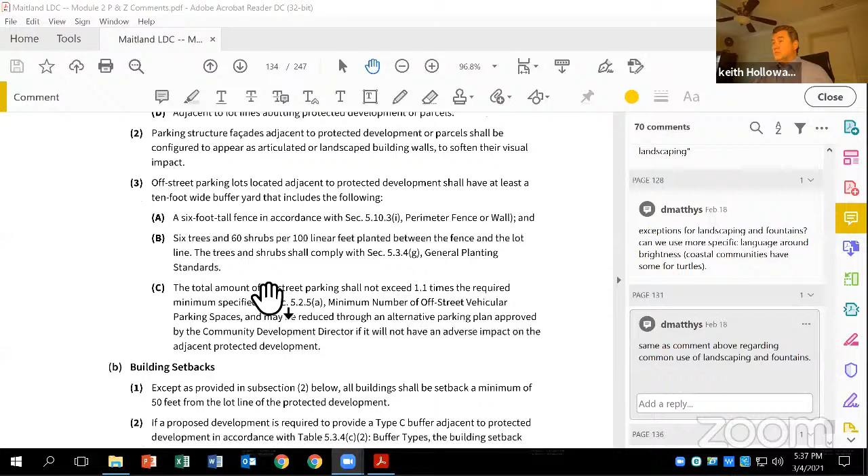So the first comment was from Kathleen on page 523. Footnote, is this applied citywide? These are the residential compatibility standards. Is that your question, Kathleen? Yeah, correct. Yep, these are applied citywide. Right now they're in place for downtown, but this would basically apply to any commercial development abutting a single family neighborhood. Okay.

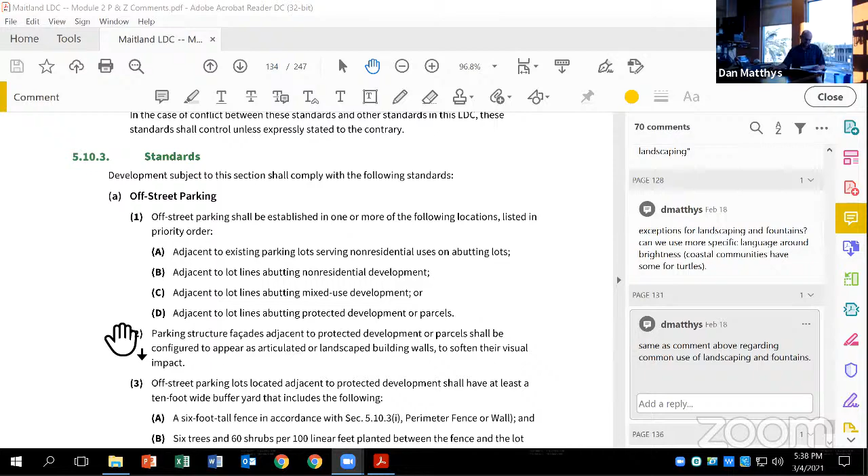So kind of like before, I think what's been working well is if the author of the comment wants to state it, and then we can all discuss it, rather than you'll hear enough of me talking anyway. So if you go to comment 2, Kathleen, that's yours as well. Yeah, I was just questioning the density of the bushes, what they were asking for on B, the 6 trees, 60 shrubs per 100 lineal feet. Again, when you start planting that, how is that? Are they going to survive if they're in front of each other? Are they going to be able to get enough sun? Is it going to be enough? You hate for people to waste money on landscaping and have it die because of the quantity we're making them put in.

Sure, and this is consistent with what we do now. Okay, it does seem like a lot, but you have to bear in mind that it's 10 feet wide. So if you think about it being linear, 100 linear feet, but it's 100 linear feet by 10 feet in width, that's why you can stagger them to get that fullness and thickness. Okay, so I don't know that I see where it says it's 10 feet wide. Up here, so I have a 10-foot wide buffer that includes... Okay, got it. Right, so it's 50 feet, it's going to be 3 trees and 30 shrubs in a 50 by 10 area. Okay.

Thank you. You're welcome. And number 3 is yours as well. Yeah, I was a little concerned with just reducing down, that it's specifically that the community development director can just reduce the parking below the minimum of what we set here in the land development code. And that I don't know why we'd want to allow it to be reduced below the minimum.

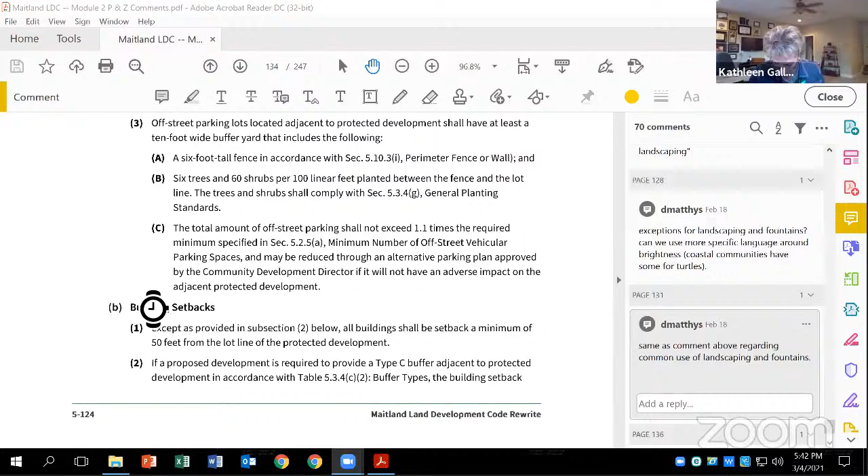Okay. And then the next one, just... oh, you know what? I think I have the wrong page.

Well, no, I don't. Well, yes and no. And I think I missed one, because the building setbacks, I had right there B1, where it says except as provided in subsection 2 below, all buildings shall be set back a minimum of 50 feet from the lot line of the protected development.

And I wanted to know how that works on like Maitland Avenue or Horatio Avenue, because I don't know that those lots are big enough to have a 50-foot setback. Because the ones off of Maitland Avenue, I don't know that they don't abut right. Oh I see, some of them do. Yeah, some of them do.

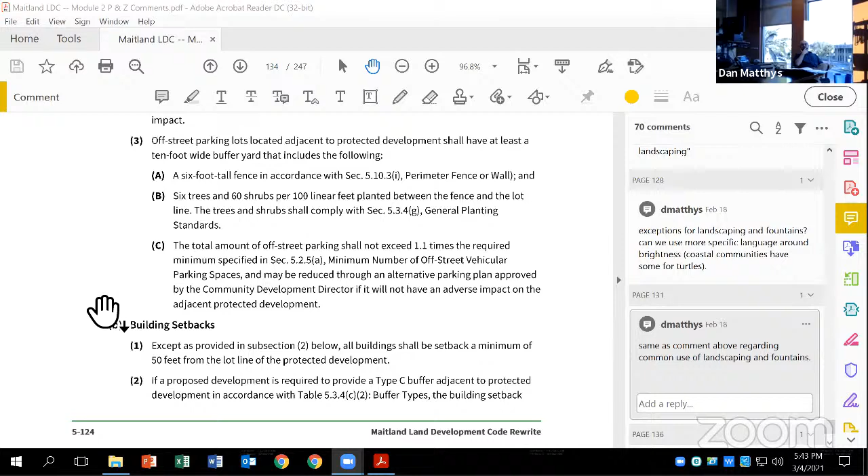I see what you mean. So how do you put a 50-foot setback? You see what I'm saying? If it's a 100-foot wide lot, then it would have to be pushed up against the Maitland Avenue side, essentially. Correct. I brought the same thing up, Kathleen, about a different, I think it was related to lakes or something, but it was the exact same comment.

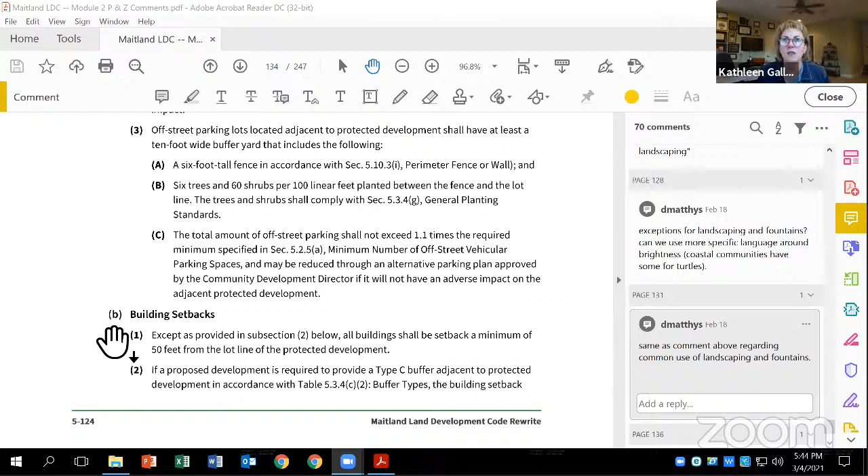What happens if you don't have it? Right, well, and then, right. So do we not do development because of that? Or, that's my question, again, I'm just trying to visually see how do you do a 50-foot setback on, like you just said, a 100-foot lot?

Well, you do have the exception here below, where if you provide an 8-foot masonry wall, you can reduce that buffer to 35 feet. And that was something that we put in there because we thought, not in all circumstances is 50 feet appropriate, and so that would come into play there.

So you'd have a 35-foot setback from the protected development. And you would just have to, it's a matter of certain kinds of development on that corridor district of Maitland Avenue. You just have to, it'd be a challenge for how you orient your buildings, essentially. Right.

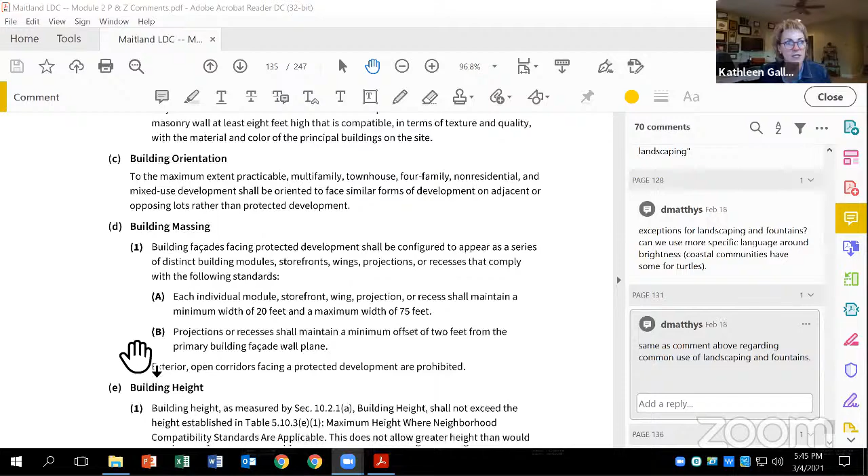Okay, and then down to the table, same thinking or line of thinking on that table, where it's 100 feet to 150 feet, the maximum height lesser of 4 stories or 45 feet. And again, I'm just trying to, like Glenn, get the visual. How would that work on a Mercedes dealership property?

Just again, taking that lot, it's long, it's not wide, and it backs up to a neighborhood. Correct. And so, yeah, it's long and narrow.

Well, they wouldn't be allowed to go over 3 stories, which I don't think they are currently. I don't believe that garage exceeds 35 feet. They have an 8-foot masonry wall. I don't know what that wall exists right now, but I don't think it's 35, I don't think that it's set back 35 feet. I think so, if those standards were applied today, I think you'd see that building pushed back away from that residential development. Do you know how far that existing structure is from the Versailles neighborhood?

For that, I don't. But you know, when you kind of look at it driving by, and then the other thing is how much closer can you push it to the street? Well, I think it's fair to say that if that would be something that would be really interesting to do in our testing phase.

Apply these standards to a potential hypothetical redevelopment of that site. I think you would see that the building, instead of having parking in front where there's cars parked, our standard would call for that development to be pushed up to the street. So the building would be closer to 1792, but it also calls for parking, when possible, not to be next to the residential neighborhood. So I don't have that complete answer, but it would be a very interesting test case.

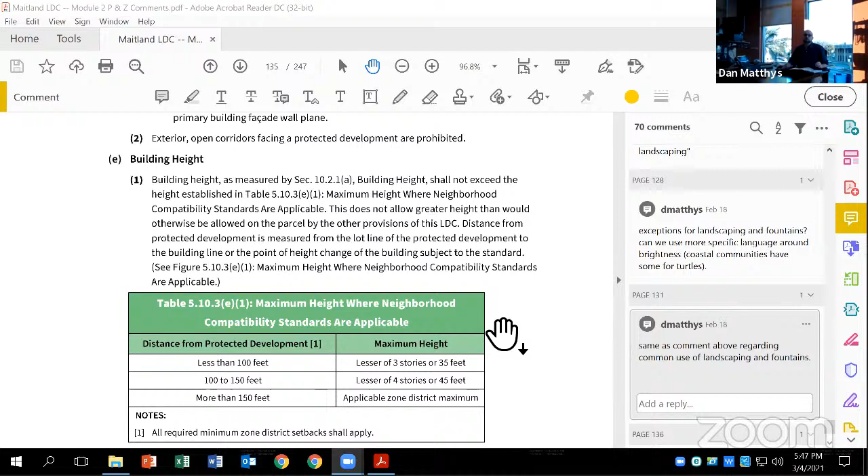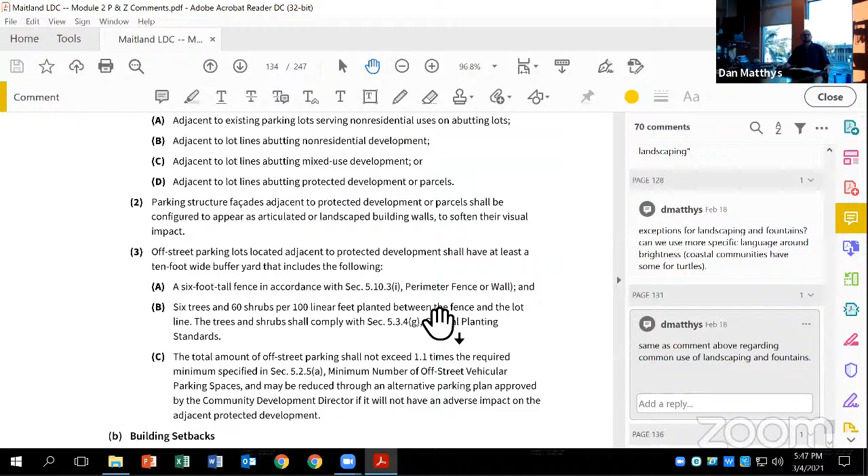In this one, we may need to have some relief language. The language that's in there about the 100 feet, 150 feet, that was specifically added by council during the comp plan amendment when we were doing the Main Street future land use. During the transmittal meeting, council specifically said there's 2 sections along Main Street where we want a wider distance of setback, and one of them was that area where the Mercedes dealership is, and the other one was down by like the Enzian area. They said those 2 areas, we want instead of 100-foot transition, we want up to 150 feet transition.

And so that's how the comp plan was adopted. So this was just kind of following suit with the comp plan. If we need to have some kind of relief mechanism, potentially through a PD, they can ask for a height variance or something like that. That's something we can definitely consider doing.

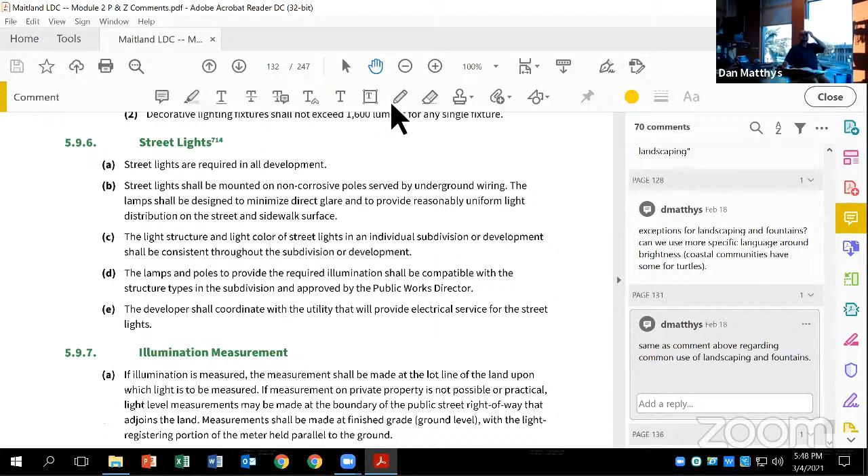Okay. It's a good point though, because that is a long skinny piece. Right.

What is going on here? Why can't I do comments?

The exterior lighting on 127 says the source of illumination is not visible from a public street right of way or an adjacent protected development. I understand the protected development part, but why wouldn't you want a public street right of way or sidewalk to be lit? You don't want glare projected into people's eyes while they're driving.

The lights for the right of way are specifically designed for illumination and safety. This standard specifically applies to lights on a building. If you imagine a security light shining out from a building that crosses over into oncoming traffic, we don't want that happening. That's the idea.

Oh my God, I'm struggling here. I can't, it's not letting me put comments on. What's going on? I might just have to close this. Let me close it and reopen it.

While Barrett is trying to get the screen working, we had a case on, I think it was Maitland Concourse South, where the building installed what they called security lights that were really, really bright, almost like floodlights, all up along Maitland Boulevard, along that building. We were getting a lot of complaints, even from the brightness that you could see across the street or even on the street. So it's really just to protect against something like that happening.

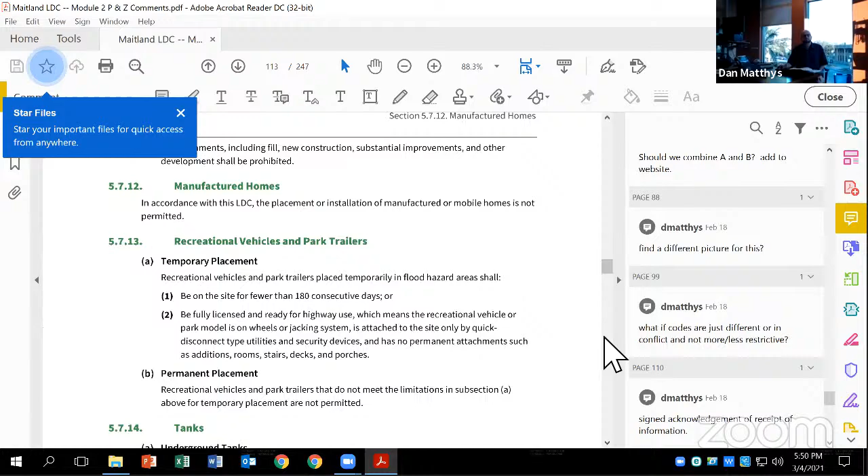Where was the property? It was Maitland Concourse South, the offices on the south side of Maitland Boulevard. They had gone in and installed these really, really bright floodlights that, instead of pointing down, were pointing straight out, lighting up a lot of area that it didn't need to.

The next one is the signage right below it, a minimum of 150 feet from the lot lines. Kind of what Glen and I were just talking about, what if you don't have 150 feet? I think that's a great point, especially there. There's a lot of lots that won't have 150 feet, so that's a good catch. We'll probably have to write a standard for cases where that's not possible, with an alternative.

Right, so, there we go. Okay.

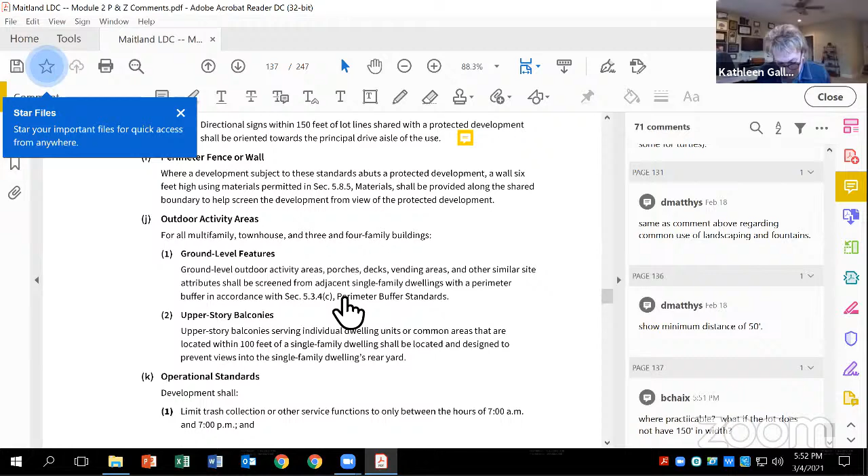Okay, and then the next one right below that: the perimeter fence or wall. It says where a development subject to these standards abuts a protected development, a wall 6 feet in height using permitted materials. Then if you go back to 125 at the top, it talks about a solid masonry wall at least 8 feet in height that is compatible.

I see how that's a little confusing, but the 8-foot wall is only required if you're using it to reduce the required buffer. In other words, if you want to go from 50 feet to 35 feet, you have to use an 8-foot masonry wall. Otherwise, you can use a 6 foot high wall, and it can be other materials. So there has to be a wall no matter what. It has to be 6 feet tall using those materials, but it has to be an enhanced wall, 8 feet in height and specifically masonry, if you're reducing that buffer from 50 to 35 feet.

Okay, so should we say in there just a wall 6 feet high using, and then insert 'or other materials permitted' so that it's a little bit clearer?

Does that make sense? 5.8.5 is just referring back to the material standard. Do you mean the previous mention? No, where we are in 127, the perimeter fence or wall section. It says a wall 6 feet high using, and I asked should we insert 'other materials permitted' right there, versus the other one, which says a masonry wall at least 8 feet high to get the 35 feet. Now I understand.

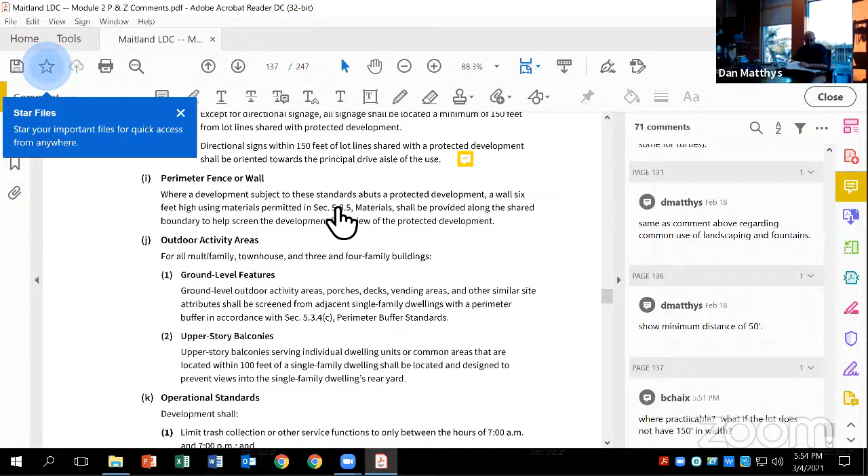We don't want to exclude masonry. This actually has a link, you can see how I'm activating it. When this code is online, you'll be able to, or in a PDF, follow the hyperlink and it'll take you right there. The materials listed are masonry, ornamental iron or decorative metal, painted wood, and composite materials.

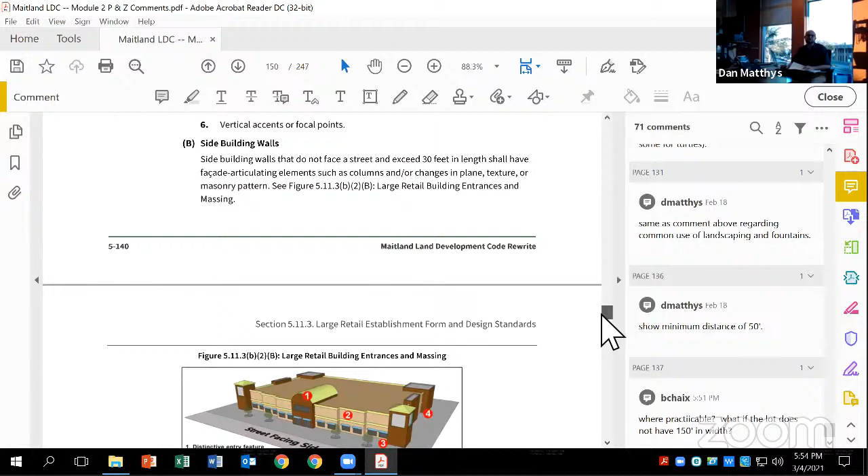Okay, and prohibited. So I don't know that we need to change it, but... No, I understand, it is a little confusing, granted, because we added that. We've done a little tinkering with this.

Under K, it says limit trash collection or other service functions to only the hours between 7 a.m. and 7 p.m. I was wondering how you could regulate Waste Pro or one of these other dumpsters, because a lot of times they're picking up at 5 and 6 o'clock in the morning at commercial buildings.

That's when, if this is adopted, they'll have to put off the commercial buildings adjacent to residential zones until 7 o'clock. It'll just be part of the ordinance. But again, who's going to enforce it? It's a code enforcement thing—if somebody takes a picture of them and sends it to the city, we'll

call them and tell them to stop. Ultimately, they're contracted through the city, so if they're violating their contract or city ordinances, we have mechanisms to enforce that. But it starts with code enforcement, just like any other part of the land development code, like noise, which I think is the next one Keith had a question on.

On that same second section here. Is she okay with that answer? Does that make sense, or okay with that? Yeah, no, I mean, I get it.

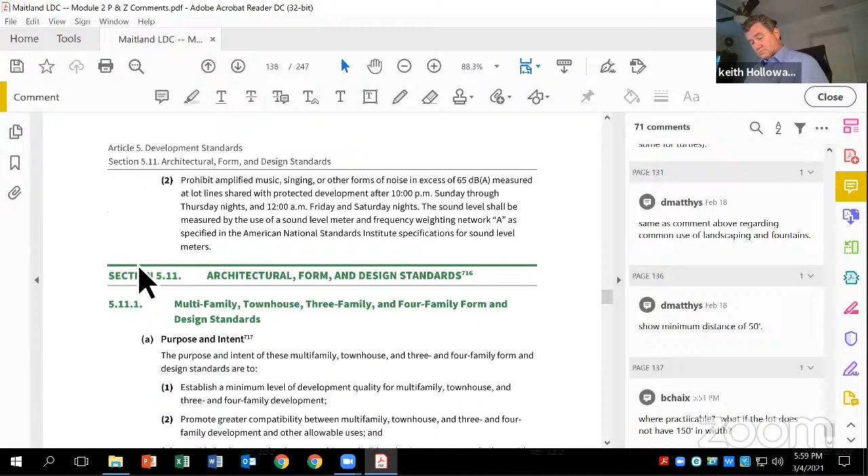Okay, we've got those in place for downtown now, and this is, like I said, expanding these protections to other parts of the city. But Keith, that means you can sit on your porch and play a saxophone really loud, and it doesn't matter if you bother the non-residential. The problem is the sound comes back at me—it doesn't go away. Well, then you better be a good saxophone player. Yeah, I know, not so good.

All right, Keith, the next one is yours, and I'm prepared to answer it, but why don't you go ahead. This is the one I have on 5-129, number 10—this was the one about alteration. I thought we discussed this in another section about having that defined somewhere, but I didn't go looking back.

You're right, and I don't think we do. I know, I do think we had this discussion, and we have been having this discussion throughout. I don't know that we settled on an answer. Dan and I were looking through the Florida Building Code this afternoon at their definition of alteration.

We don't have to go down that rabbit hole, but you're absolutely right. I think we need one definition that applies to the whole code and clearly distinguishes between a repair or maintenance versus an alteration. Either we add it to our definitions or reference some existing definition. The problem is we looked at a lot of different definitions - dictionary definitions, Black's Law, planner's dictionary, building code. I think ultimately we're going to have to take a hybrid of some of those and make our own, because all of them were decent, but none really captured everything well. Some were too stringent, some too lenient. So I think we might have to come up with our own hybrid one.

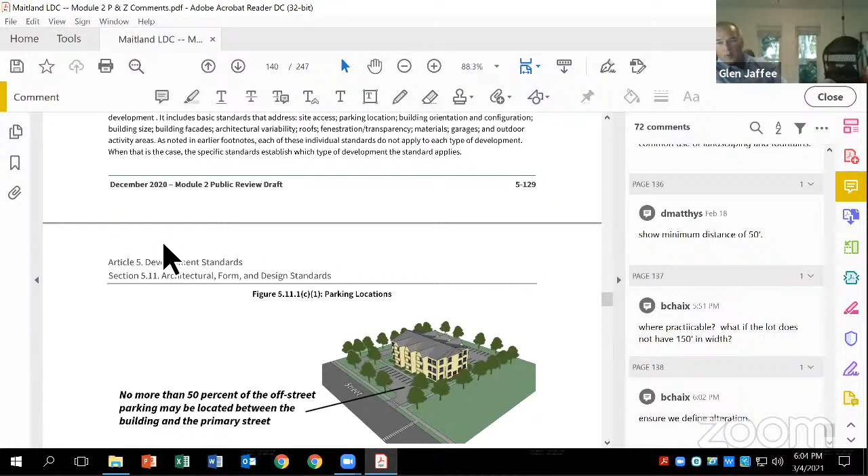I had a question coming up that's related to all of this. Why do we call it 3 and 4 unit dwellings versus just 3 or more? If I'm not mistaken, they're treated differently in the use section and in the building code, right? I think the building code distinguishes between single family and duplex, and then 3 and 4 family. But do you mean just like, why is it like?

Yeah, like you're right, why not 3 and above? Only when you say 4 family, that's like a quadplex. Yeah, so basically it's divided into single family, duplex, triplex, quadplex, and then apartments. Everything above a quadplex is an apartment.

Okay. But in the Florida building code, there are different standards, is that right? Correct. Okay, this will answer one of my questions later. You'll just see. Sure, but yeah, it's distinguished in the use table as well, I think.

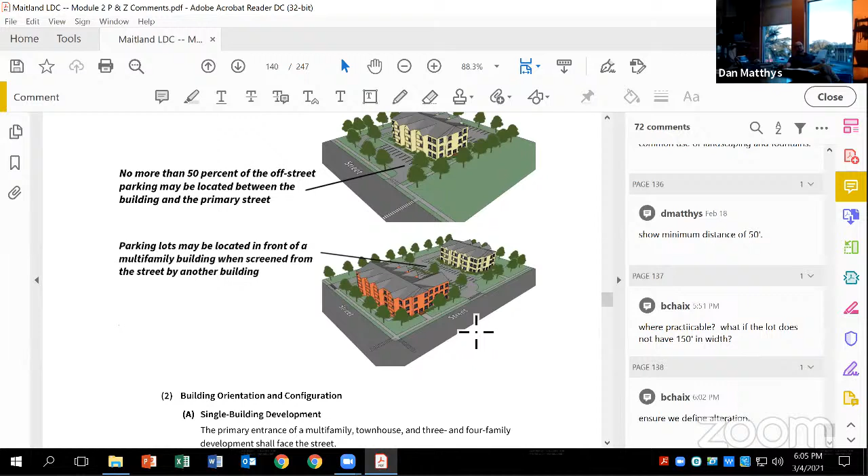Keith had the next question, and it's kind of distinguishing this graphic where it's labeled street and street, and you're saying, well, hang on, this is not behind the building because it's on the side of the building. Yeah, there's a couple of issues here. One is we talk about primary street in the first diagram, and then we say street in the next diagram. So the question is, are those two the same thing? In the first diagram, which one are you talking about?

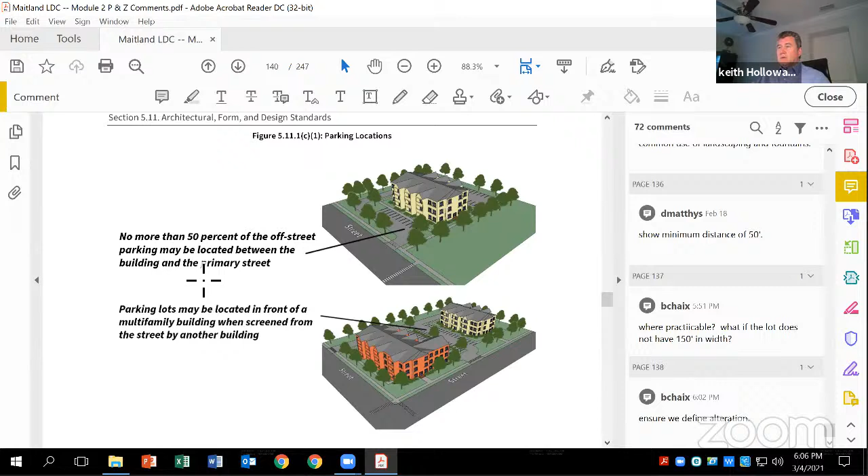Oh, you had it up there. I'm talking about the two images. Right, it says street and - okay, oh, primary street, gotcha, right. Yeah, so there we talk about a building in the primary street. And then the next one talks about when screened from the street. So is primary street and street the same thing? I see. Because it does talk about external streets, internal streets. The text doesn't even distinguish between primary and secondary.

So my point is, I think unless we're giving them equal meaning somewhere, either we need to call everything by a specific type of street or define street as something.

Well, and to your point, take the corner of like Maitland Avenue and Sybelia Parkway. Which one of those is considered the primary? I would assume Maitland Avenue. So then it would be oriented to the primary, which would be Maitland Avenue, right? Yeah. Sybelia? Unless that is just basically saying that generally, when you have a primary street, only 50% of the parking can be in the front. But I think what they're saying is regardless of the street, as long as you hide the parking by another building, then it's okay, regardless of the street type.

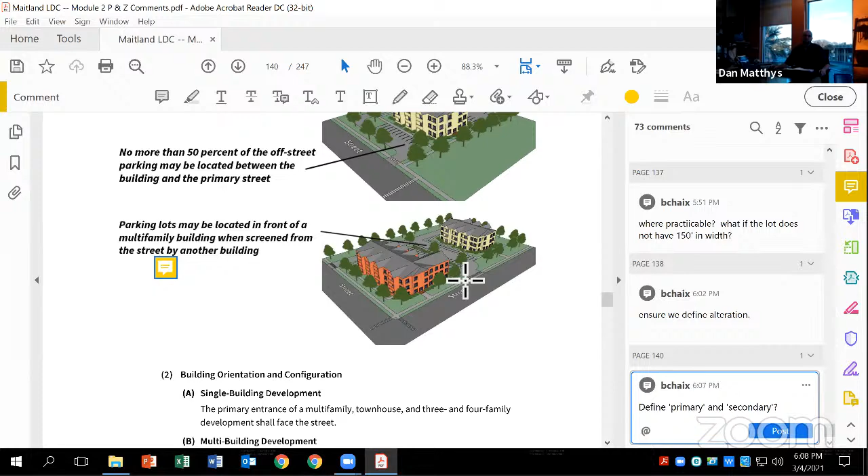I think the intent is just to hide the parking. In that graphic, they were putting 100% of the parking in between, but hiding it. That's the way I read it - they want at least half the parking hidden, but in the case below where they're putting all the parking in front, they can do that as long as it's hidden by another building.

To the second drawing down there, I believe I'd have been less confused if we didn't show both streets - just take that second street off. With what they were trying to explain, it confuses the issue when you add a second street, unless you label one primary street and the other secondary street. I think the only reason they showed that second street is because they were trying to show how you get into that parking lot.

And I think that's fine. I think what I'm hearing is all of this is around a primary street, so we're labeling this primary street, and maybe you label this one on the side there as secondary street, if you want to have that. Okay.

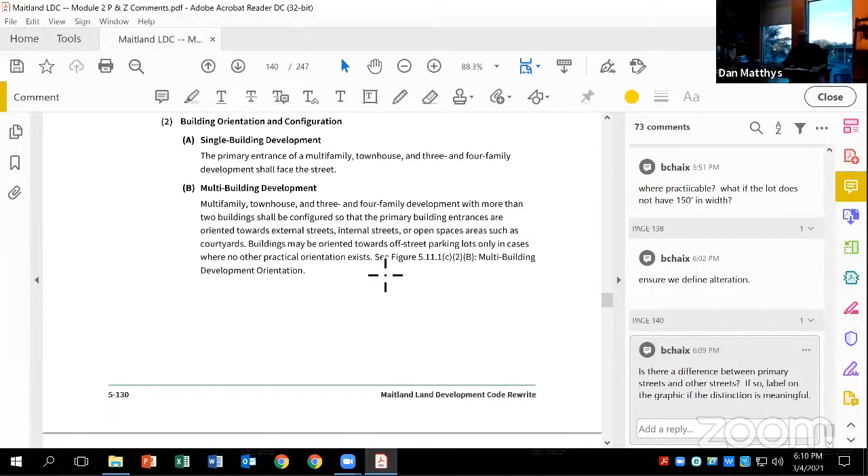So your next comment about whether this is an illustration of this, right? If I understand your comment, we're only in cases where no other practical orientation exists. I don't think this is illustrating buildings oriented towards parking. I think this is trying to show the correct way of how to orient it, which is either towards the street and away from the parking.

Well, I think it's just the way they worded this. It just all of a sudden has this reference to multi-building development orientation. I don't know if I'm reading this too literal, but this paragraph creates this sort of default statement, and then all of a sudden it just says see figure. So either tell me what I'm looking at that figure for, or move that default sentence after referencing the figure.

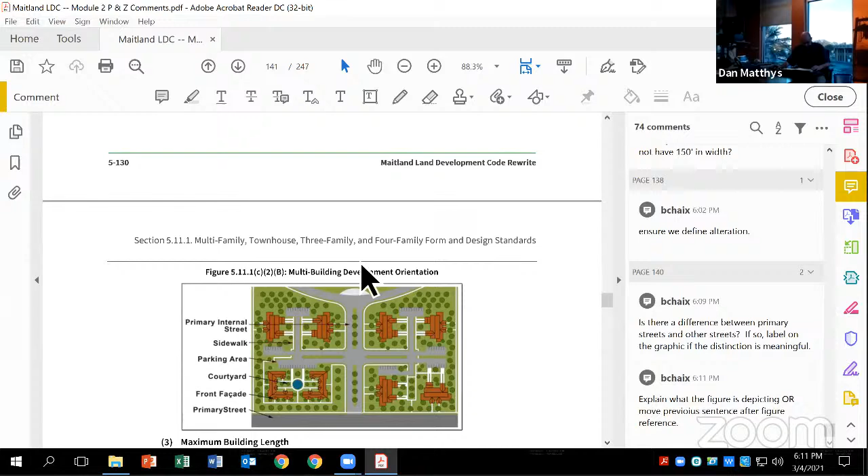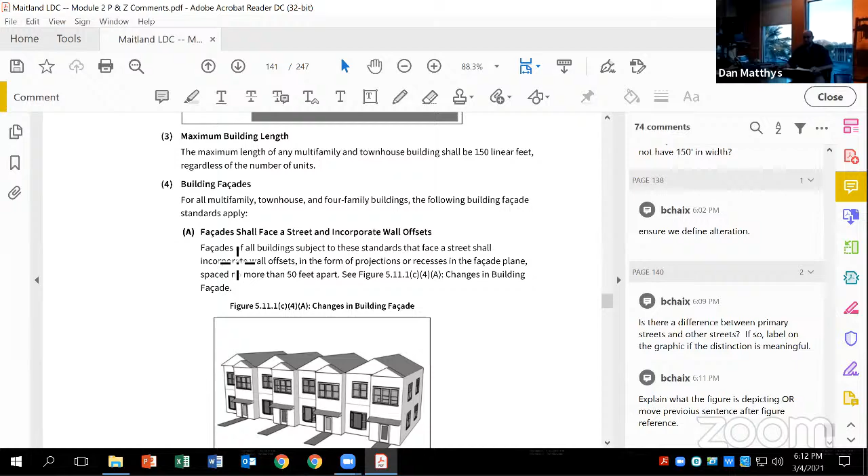Okay, yep. And then the next one is just again, we're calling facade shall face a street and incorporate wall offsets. Again, it's just terminology - are we talking about the primary street? Right, so it's... okay, so would it be?

I think what they're saying is just if any building that's facing a street has to have these facade things. Now I don't think it makes a distinction between primary or not. So the facade shall face a street - facades of all buildings that face the street shall incorporate wall offsets. So I'm sorry, what was the concern - was that it's not clear if it's all streets or just primary streets?

Yeah, so I guess that would be the thing. If you take that approach, then go through anywhere it just says street, and if you feel like it doesn't matter what type of street it is, that the terminology is relevant. But it seems like some of these they're actually talking about primary street. This one they may not be, but right. Okay.

You're worried about comment 16 - I guess worried's the wrong word, concerned about the issues of really faux porches, like fake porches. Yes. So do we have a definition? I've seen people put something that's just enough to get a column out in front of the face and they call it a porch, but you can't put a chair on it, you can't walk on it. So if it's important to us to have it actually mean a usable porch, then we set a minimum.

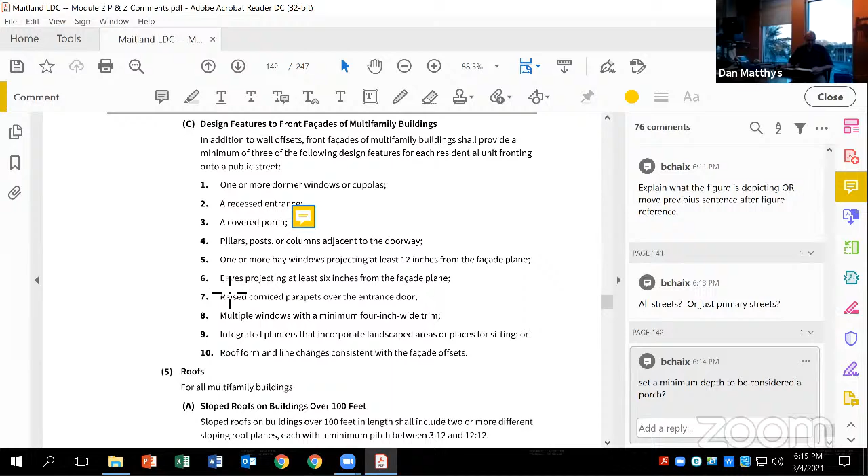Moving right along, all right. So yeah, this other one is another good comment that I don't know the answer to. I didn't go back through my FBC, but I know there is something in there on parapet heights relative to wind loads, and I wanted somebody to verify that - because if the code said anything over 2 foot 8 inches you have to do this extra protection, I just wanted us to understand that and not put something on our builders that will cost them extra money when 4 inches didn't mean that much to us.

And I guess that is part of that question. What was driving that 3 feet? Does that have to do with concealment of roof equipment, or what was the thought? Yeah, that's generally the height we have our parapets at now, just to hide it.

Peacock Ford recently went and put parapet walls all around to hide their screening, because they originally didn't do that. So we had to do that. And I know they came in with different materials. Some were like 4 feet tall, some were 2.5 feet, based on the material, because different materials met different wind load requirements. So they were saying, if you wanted us to go this height, then this material is most appropriate for the building code wind load.

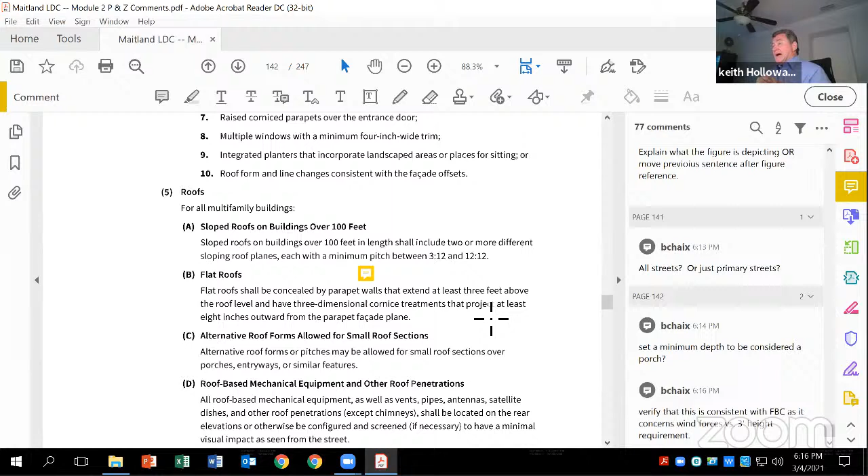But yeah, the 3 feet was generally to block equipment. And if you feel that's what we need in the conditions you've seen, I just wanted to draw attention to it. No, good thing to check.

All right, in the Kathleen, what was the roof should be screened all the way around? That, under D, is kind of just what Keith was talking about with the screening. You see where it says it should - to me, I read that as just being a partial screen, whereas driving by First Watch, you can see all the mechanical equipment on the roof over there.

Or the plaza next to First Watch, you're right, you can see all the mechanical in there. Well... never mind, I won't say that.

No, that's a good point. Generally, we require the parapet on all sides that are visible from off-site. So if you're driving down the road, no matter what angle you're looking at, if you can see the equipment, we require it. If it's the back of a building and it just backs up to another, like in the case of First Watch, it backs up to the mini storage - granted, First Watch is such an old building that it's several codes before us.

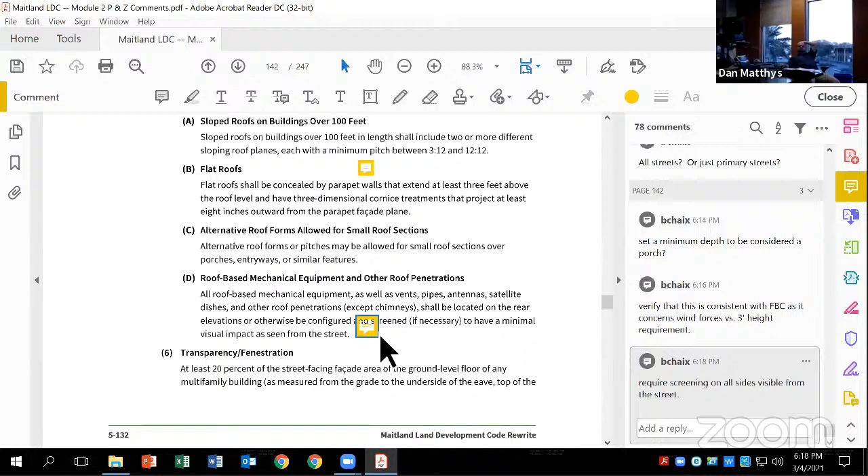Is the importance the street, or as we get into more bike trails, we don't want the bike trails to be in the back of house, so it's almost just visible from the public right-of-way. I think so, it's because it's not just street orientation that we are beginning to care about. That makes sense, yeah, fair enough. Okay.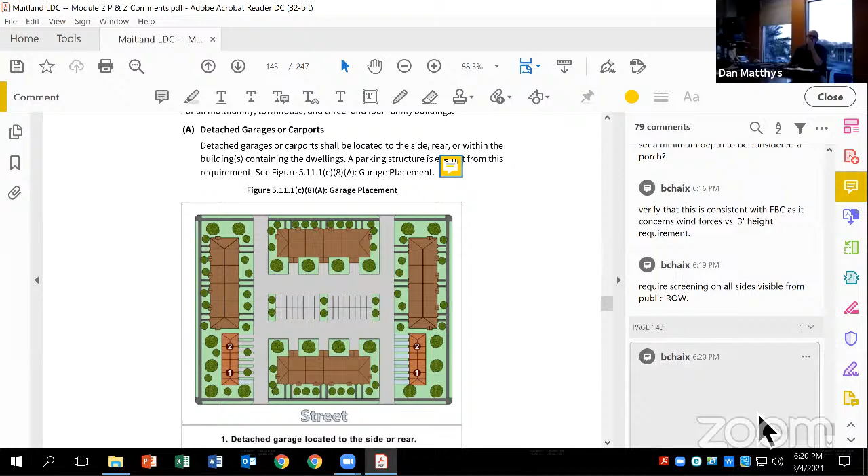Okay. Oh, I mean, I hope it goes without saying, we've been doing this for a long time. If other commissioners have comments on these sections that didn't make it into the written comments, I just want to remind everybody it's perfectly all right to jump in, interject at any time.

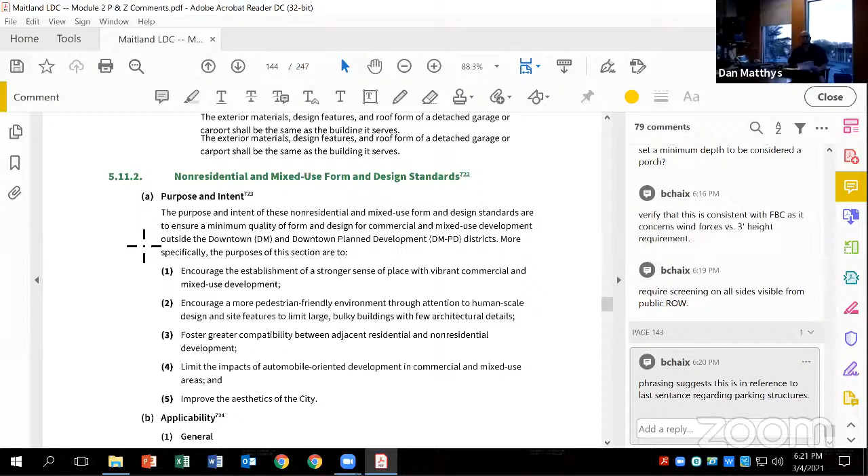Next one is on 134, on the applicability section. Was this kind of what you were thinking about, whether this is redundant because the whole title refers to non-residential and mixed use form and design standards? Well, on 20...

Well, it was - are we saying the same? So the title is non-residential and mixed use forms, and then down under applicability, it applies to new commercial and mixed use development. Was that just - did it mean the same thing, or does it mean something different?

Oh, because this is not the distinction of non-residential versus commercial. Yeah, I got you now. Okay.

Hi, kid. Where are you going? Here.

Okay. Pretty easy fix, I think. For 21.

Is this your concern, that it talks about plazas, seating areas, pedestrian connections, and gathering spaces? Yeah, it just seemed like you would have something more. This is a pretty generous image.

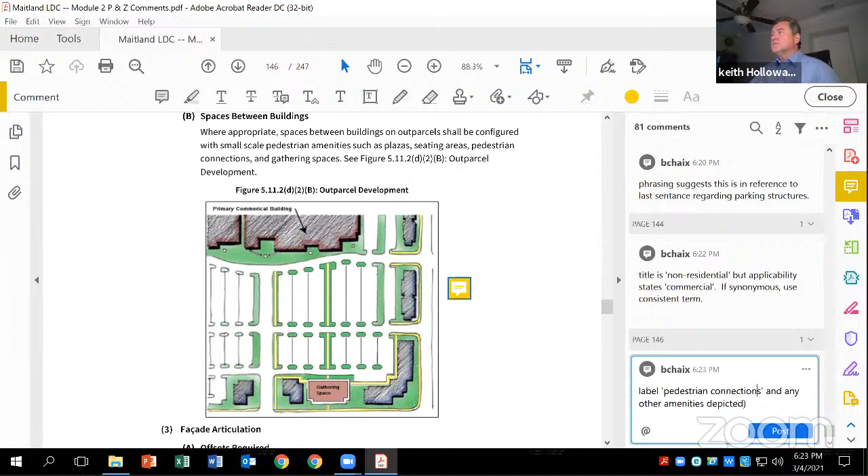Yeah, this is an opportunity for, I don't know, the plaza seating area. Anyway, it just seemed like a lot of image, and we did not call out a couple of things. Definitely. Okay.

All right, comment 22, I think this is yours, Glen. Yeah, feel free to correct me if I misinterpret this, but sometimes I worry when we get into facade colors and some of the specificity. It was our discussion a couple weeks ago when we said, hey, we shouldn't be telling somebody no St. Augustine grass. Are we prepared to police this kind of thing? If we're getting into saying your color must be a particular type, then that might mean they have to permit it so we can make sure that it is. And is this the business we want to be in?

Dan and I discussed this earlier, and we have, Dan has thoughts on it. Oh, you look like Dan, like you're pivoting around to answer the question. Yeah, I was just getting comfortable.

In any non-residential development, we require a site plan that requires elevations, and those are tied to the approval process. So any change in any external piece of a non-residential development has to go through a site revision or a minor site revision. In a case where it's a simple color change, it's just merely them saying we're painting it from this to that, and it's a simple okay. But unless they're obviously doing like bright purple or something.

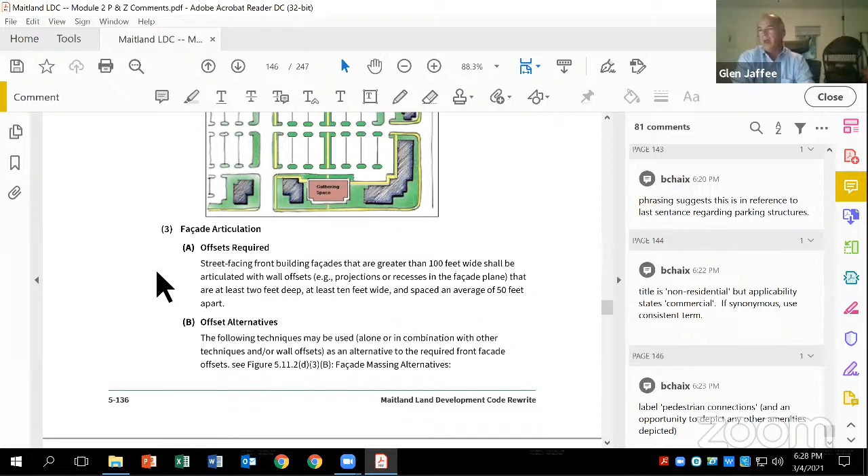Well, I think you want, and I don't think this is saying that we're necessarily dictating specific colors, but you want some oversight. You're assuming somebody's getting a designer to pick the color, and that's not always the right assumption. Even a designer could do something that really hurts the others around them. This probably follows up to Kathleen's comment on the next one. Metals, why not metals? Are we getting into that kind of specifics?

I put that out, that was my comment, and I'm not stuck on it. So if you guys are all good, then I'm good too. It's a good comment, I think. Yeah.

But folks are okay leaving it as it is right now. Honestly, I think my issue with it is that if I'm reading this correctly, this isn't about a specific color or the number of colors, but you're looking at a single plane and you're allowed to use paint to create articulation, so there's no change in depth. Personally, to be blunt, I feel like that's a little cheap, to just paint a swath in a contrasting color. I don't know how I feel about that aspect of it. That is why I said my caveat is I may misinterpret this, so you're probably correct.

I understand. No, it's okay. I mean, it's free to change or alter if people have suggestions for how they'd like it to be read otherwise, or if that should be struck as an option.

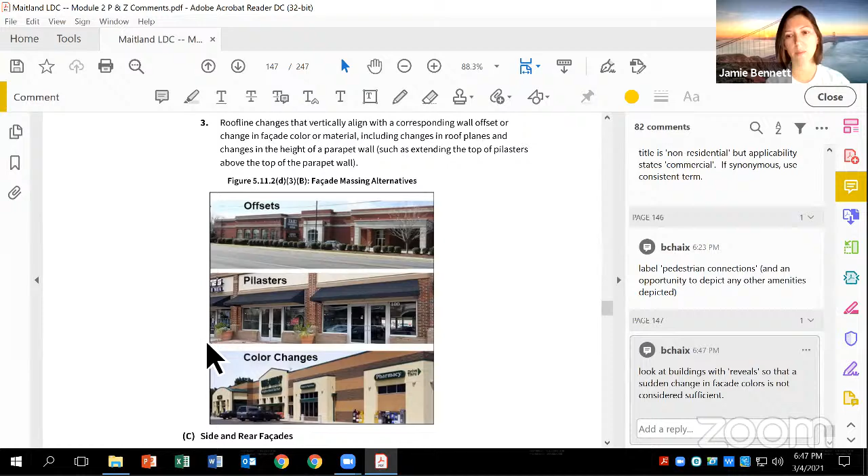Okay, I hate to belabor this, but I think there are also other architectural elements that can give depth and detail that don't include offsets - like if we were to require window casing. There's a lot of different ways to achieve an interesting and quality product beyond just this. Okay, like what, do you have some idea, like window?

Should we make a little list here? Or is that something you don't want to, or you want to? I think why don't we keep going through it, and I'm sure we'll accumulate some more comments as we go.

Well, I don't think this design center is that much longer, but that's fine. If we come back to it and you want to, if anybody has inspiration for other stuff we've covered and wants to make proposals, feel free. I think that would be well received by everybody.

Okay, so decorative metals. Missed this discussion, so we did change something. We had a compromise, and this incorporates it. We discussed this a lot at the downtown standards, and we added the second sentence: nothing shall limit the use of high quality decorative metal as a building accent material. That was specifically to accommodate the Porsche dealership example, where they did use high quality decorative metal as a building accent, but trying to prevent the corrugated metal siding.

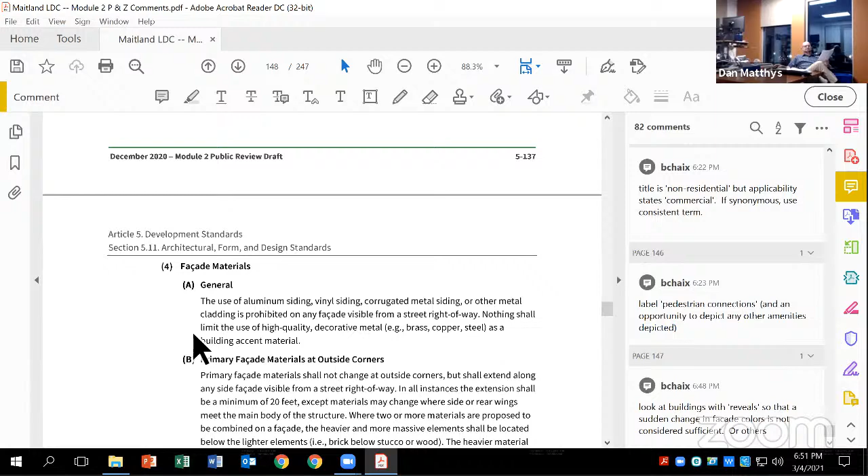And that accent material can be interpreted pretty broadly if we need to, right? I think we spent a lot of time on this phrasing because we wanted to accommodate a building like that if we wanted to. So, but.

Thank you. No problem.

All right, so Keith, your next comment was about windows. I think we had some language in the downtown portion about windows, and I remember discussing it. You want to kind of introduce your comment?

Yes, so that was the one on 5-138. This one was more about how windows are being used. We want to promote daylighting and the other things, but also want to make sure we've got some protection on how our buildings are using the windows as a feature opportunity, not as exposed storage area, or maybe it's an office window where you look up and see the garbage can and everything else sticking out. It's really just having a little bit of control on the aesthetics of what's being viewed from our city streets into those windows.

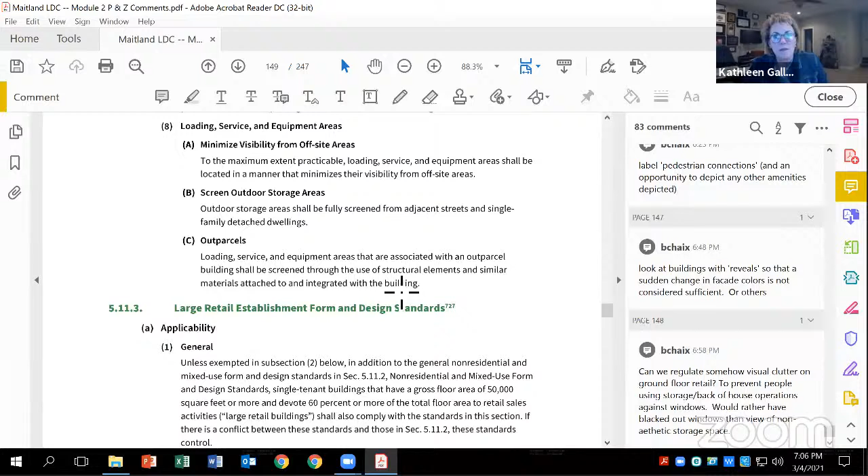But do we allow over 50,000 square feet anywhere else in the area? Yeah, in our use table, if we refer back to module 1 - I don't have that pulled up electronically, but let's see here. That's Article 4, retail sales. Consumer goods establishments, yes, permitted in the west side and downtown, or as part of a PD.

Okay, thank you. All right, no problem. And if it's already established as a PD or anywhere else, it's going to be the design standards - it's going to be legal non-conforming use. But the reason downtown is specifically excepted is because they have more strict design standards, so those would apply instead.

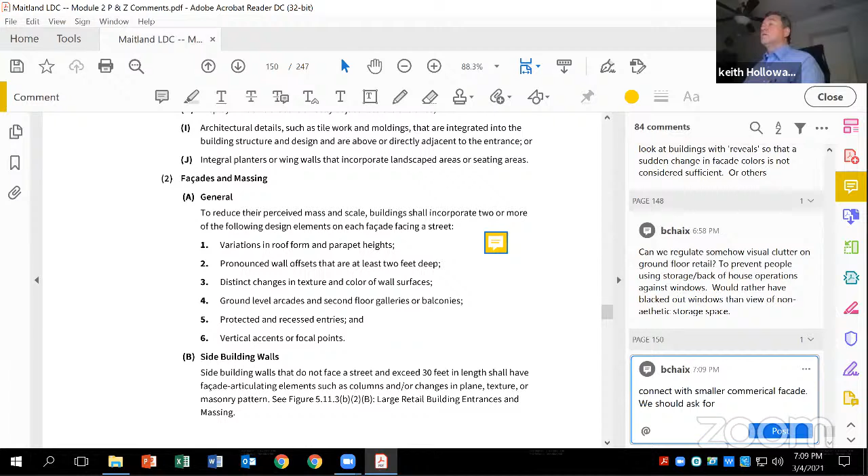I agree with you, Keith. Because I think even if we tweak this language, we still don't want that to be the primary way you address the building. So I think you really need to have 3, pick 3.

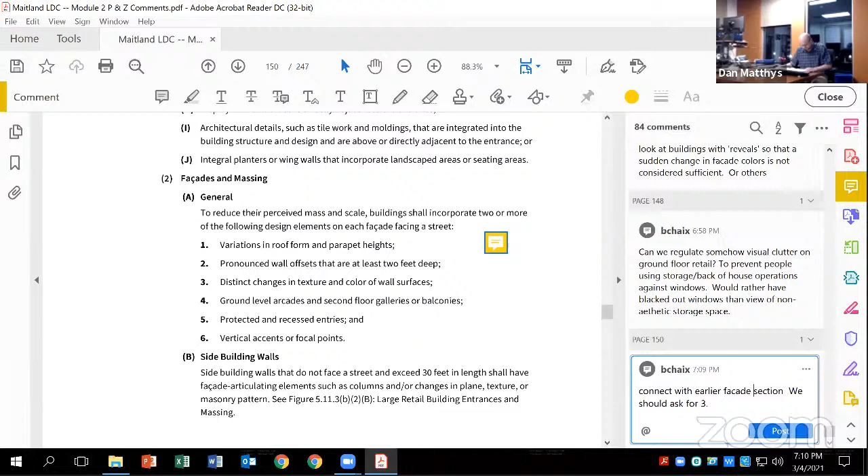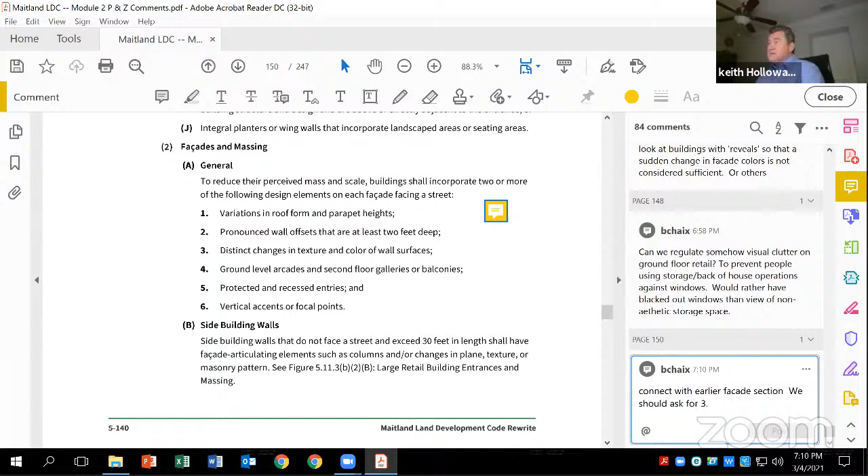Yeah, so I also made a note to tie back and make consistent with the previous facade section, so there's some common terminology. How about adding the thought of having them pick 3 of these? Yeah, and we should ask for 3. I have that, okay gotcha. Required 3, sorry. I didn't see your comment. Got it, yep. No, I think I heard consent, I heard general agreement with that.

All right, unless anybody has anything else, I think that moves us into the sustainable development standards.

First question is, this does apply to all building types and areas of the city, including single family residential. Okay, so it does. Okay.

And Glenn, similar with the applicability, unless I misunderstood your comment, this does exempt PDs that were already approved prior to the adoption of this LDC. I think my question was because it said you had an open date in there, so anything existing prior to a certain date. I didn't know if we could put that date in and all of a sudden make PDs, if it was different than any of these codes, non-conforming. Well, the intent is that this date is going to be whenever council adopts this code. So if they make it in before this code's adopted, they're exempted from this. I got you, okay. We're not picking, if we were to backdate it, that could definitely create a problem, but that's not the intent.

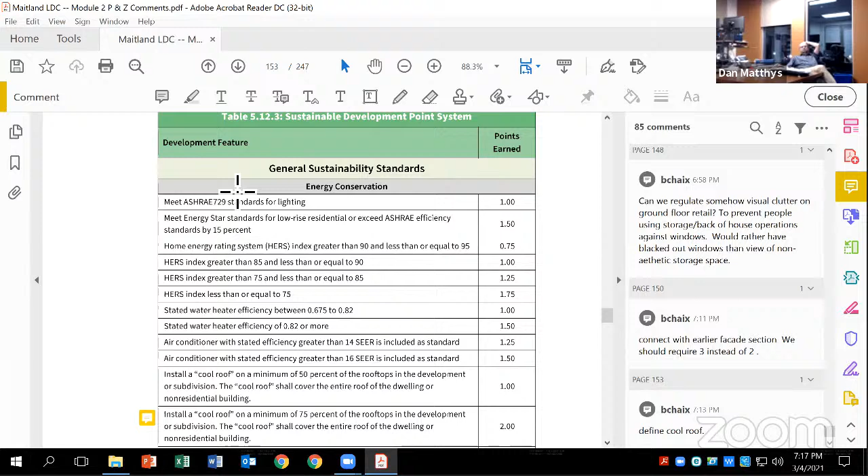That's why we're not referring to a specific edition or particular year, because to get these points, they're going to have to meet whatever standards are in place at the time they apply. That said, I think these technical things we're going to need to review every 7 years or so, just to make sure they're not completely irrelevant or outdated, because this sustainability technology really changes a lot. This isn't something we set once and forget about for 20 years.

Okay, thank you, that's a good point. I know in our mobility fee section, it's required that they go back and redo the calculations, redo a new study every 7 years. I don't think we want to be that prescriptive here, but it would be a good idea. I think we're going to hear demand for that. If these standards start becoming irrelevant, we'll need to go back into this code and update it periodically. This isn't something we're going to set and leave for 30 years. I just don't see it happening.

Hey Barrett, quick question, back on the PD, it's still on my brain. Why would any reference to a PD matter? Doesn't that supersede any of these zoning regulations? A PD is its own zoning. I forget the intention of the statement, but doesn't a PD by itself stand alone?

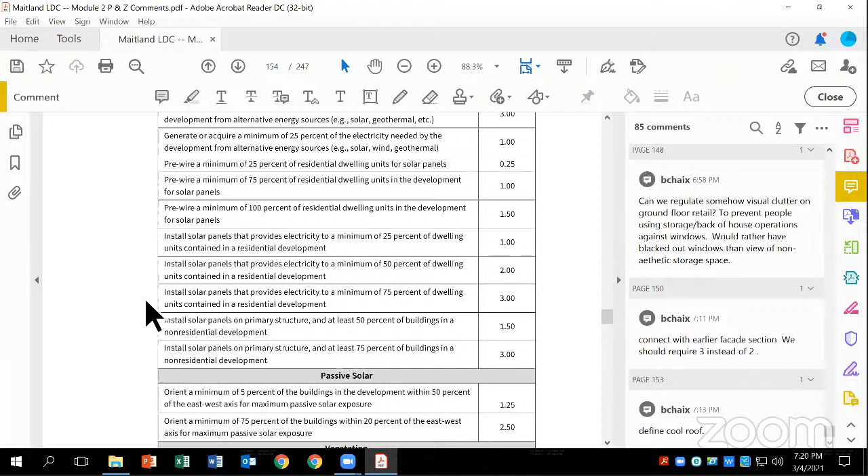No, but what about post this code too, because a PD by itself... Post this code, they would have to come in and specifically ask to not follow it, right? They would need to say, I need a waiver from this portion of the code. In other words, if you come in for a plan development and you want to be exempt from certain portions of the code, you have to put that in your application. Yeah, okay, alright, I got it.

Whereas the ones previous to this wouldn't, because this is a new section. Several people had questions about removing lawn and turf in Maitland. I think this is going to be an interesting discussion.

Not good for the environment. What, lawn and turf is not good for the environment? Correct. It's fertilized, it runs off, and it actually doesn't absorb as much as people think. Meaning, having it isn't necessarily great.

Well, I guess what I'm trying to understand is, are we encouraging residentials to just cover their whole yard in mulch? Yeah, probably not. Plant material, doing Florida-friendly landscaping with habitat and incorporating mulch into that in place of turf. But that's not what it says, it just says existing plant material or mulch. So if I read this and I wanted mulch, that's all I need to put down, and you'll give me a point and a half?

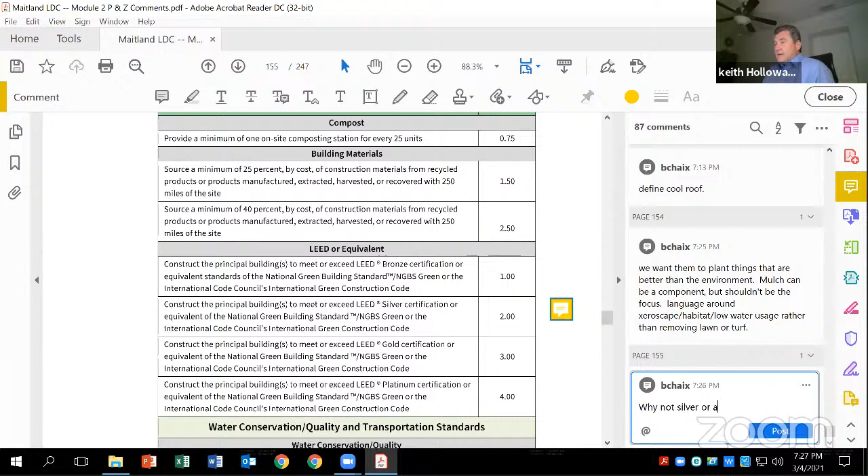I mean, if we're going to say Silver or above gets you all the points you need -- yeah, because LEED Silver, for example, we do a lot of buildings for the federal government, and for a time a lot of our buildings had to be LEED Silver minimum. That requires a multi-point system, hitting all kinds of things. And if we have LEED Platinum buildings in Maitland, that's something to brag about. Sure.

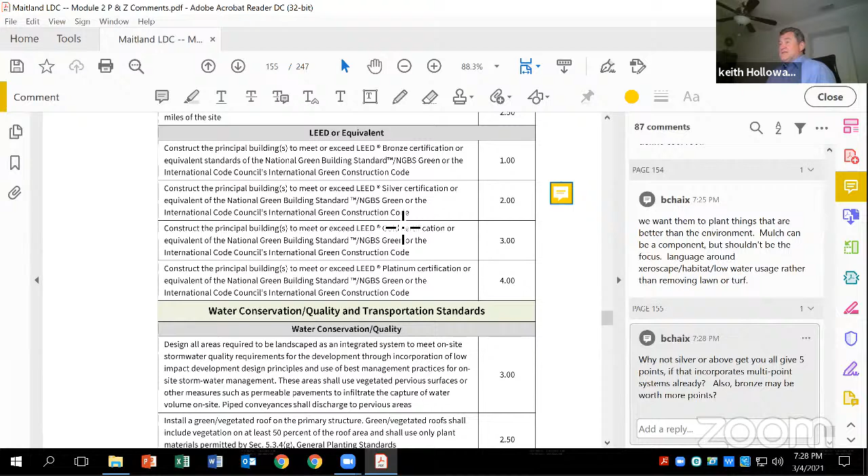Yeah, I think that's an excellent question. I would even have them check the bronze level, but I think silver might want to be the line. But maybe bump up bronze, from 1 point -- yeah, just have them check that; there might be more value in giving bronze more than just one point. Okay, and you see what I'm saying, we basically said you've got to get 5 points of this stuff. Right, yeah, no, it seems a little underbound for sure.

The next quick comment, number 37, was down here. That's about failure to install -- we catch that at the building permit level, the inspection level. But failure to maintain, that's just going to be code enforcement like anything else. This just clarifies that they're required to do this, so if they fail to maintain it, then it's a violation.

But are we set up to enforce this? Or is it just -- I mean, yeah, no, not unless somebody complains. It's not like something we're going to go inspect every year. So we're dependent upon somebody reporting that these systems, like their EV charging things, are not functioning -- it would require somebody to report it.

So I get that that's kind of a vulnerability, but I'm not sure how to address it, other than to clarify that it's a violation of the city code.

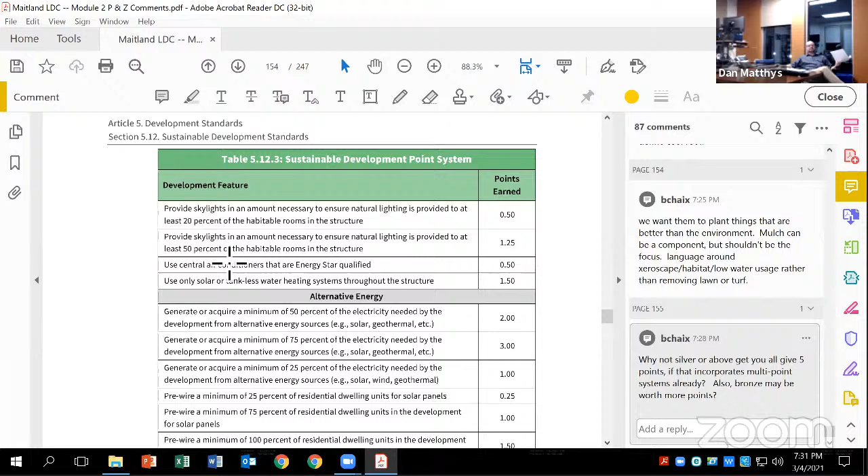I personally still think it's valuable, for certain things like skylights or central air conditioners. The question is, how are we going to measure this and track it indefinitely? There's a certain amount that's kind of on the property owner.

I guess the intent is we're telling the property owner, if you've gotten these sustainable development features approved, then it's your responsibility to keep them maintained. And if you don't, it might not only be a violation of the property maintenance code, but it's going to be a violation of the land development code because your building is required to have these.

But I think there's still value in having it in the code, even if we're not inspecting it annually. I don't even know what this would look like if somebody said, hey, you might want to go look at this. I don't know that they're really doing these things that the city has given them credit for.

Oh, absolutely. We would have the right to require that they do it, or they would face fines. Well, I guess they're not necessarily getting anything special more than that first installation, right? Well, these are requirements, right? What they're getting special is they're getting their project approved.

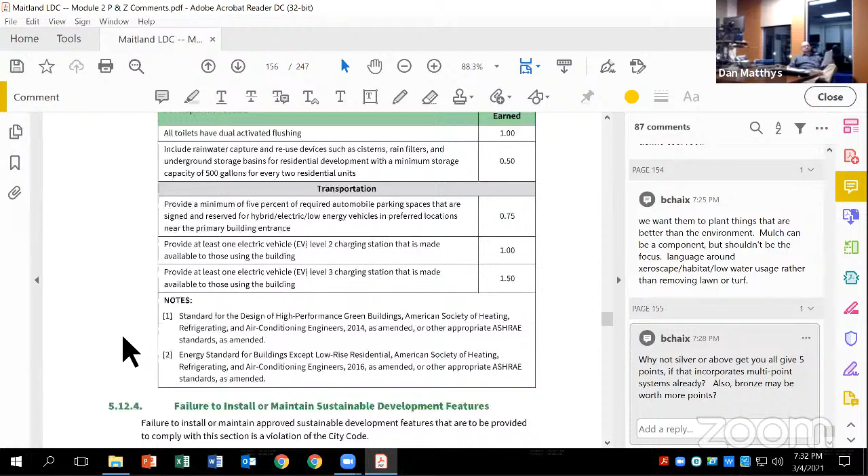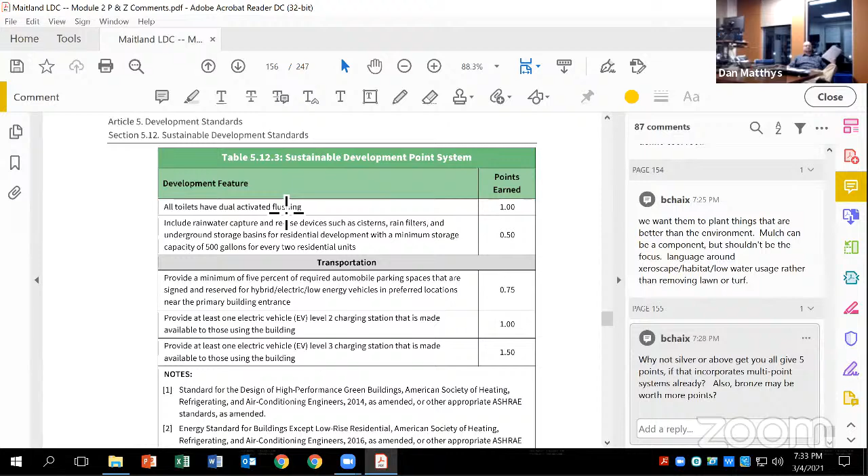And we're saying that it's not enough just to do it to get it approved, but you also have to maintain these in perpetuity. So if they come in and say, check out our vehicle charging stations and our dual-activated flushing toilets, and 10 years later we come in and these are all broken and the toilets have all been swapped out, we can say, hang on, wait a minute, where are your sustainable development standards? Where are these features that you said you were going to have?

So this just clarifies that that's something they don't have to just have on day one. They have to have it on day one, and they also have to have it in perpetuity.

I get it. I think the purpose of having this in there is that Maitland wants to encourage these things and have people understand that they're important. There just becomes so much you can do, unless you want to add resources like the fire department to go in and check all this stuff. Then the best you can do is try to instill the intent in people's mind.

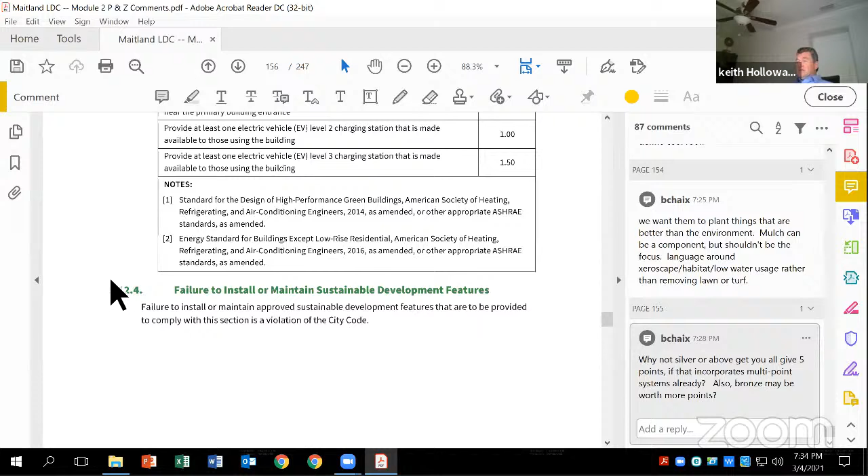Yeah, that's true. Maybe that could be done as part of their annual inspection. Maybe someday in the future have a little checklist, but the least we can do is codify it so that we can figure out that puzzle of how to enforce it later. Sorry, I didn't mean to interrupt you. No, you're fine.

So under applicability, it says all development shall comply with the standards of this section. Do you mean all future, existing and future development, or all new development? Because if we're talking about all new, therefore future development, then I don't see why you can't condition CO on meeting these requirements. Why can't some of these things be done at the inspection level?

They are. And maintenance would rely on code enforcement. Yep, you nailed it. That's exactly how you do it.

So will it apply to existing buildings? No, only if when they expand it or alter it. Only if they meet this criteria. All development, unless exempted, shall comply. Okay.

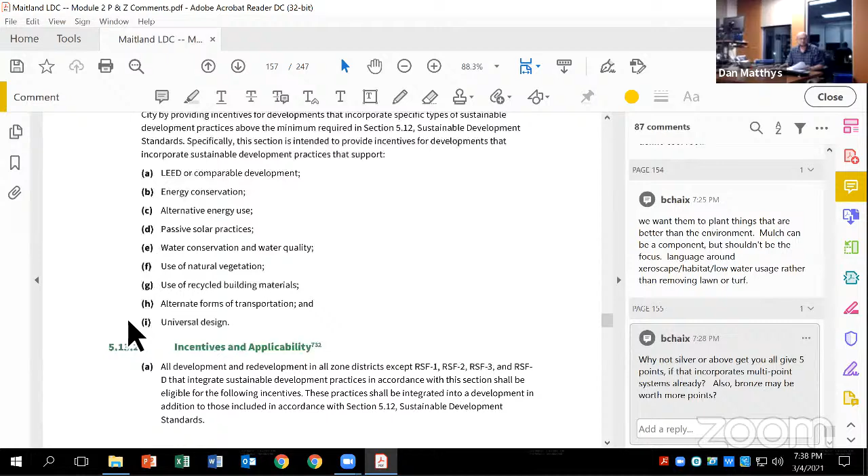Okay. Then I had a big gap after this in the submitted comments. So let me know if anybody has any further questions about these comments. Other than that, we didn't have anything until we got to signs.

Your comment 39, what was your thought about that? Yeah, so I mean, I saw billboard referred to a few times, and I know what we all think of as a billboard, but I was wondering, is that a universal definition? We understand what we mean by that, or does a billboard start to become a billboard over a specific height or size?

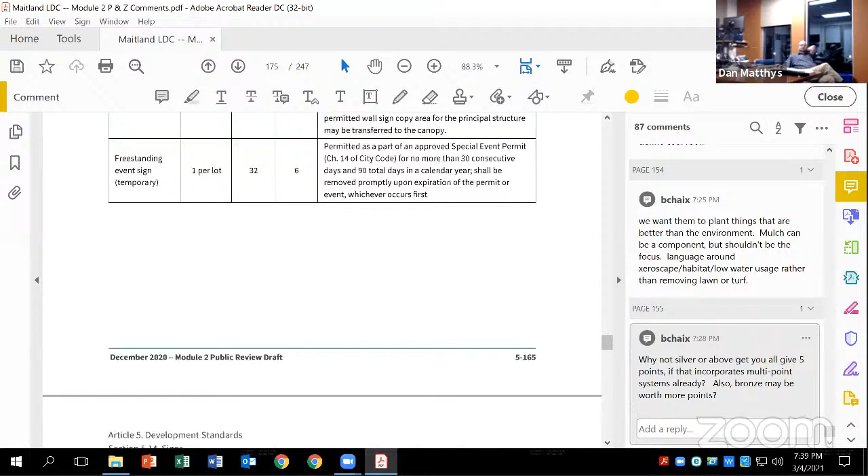Shall we look at the definition and see what it says? A freestanding off-site sign or sign structure. So that doesn't define it by size. This carries forward the existing definition. So it doesn't talk about size. Theoretically, you could have a really mini billboard.

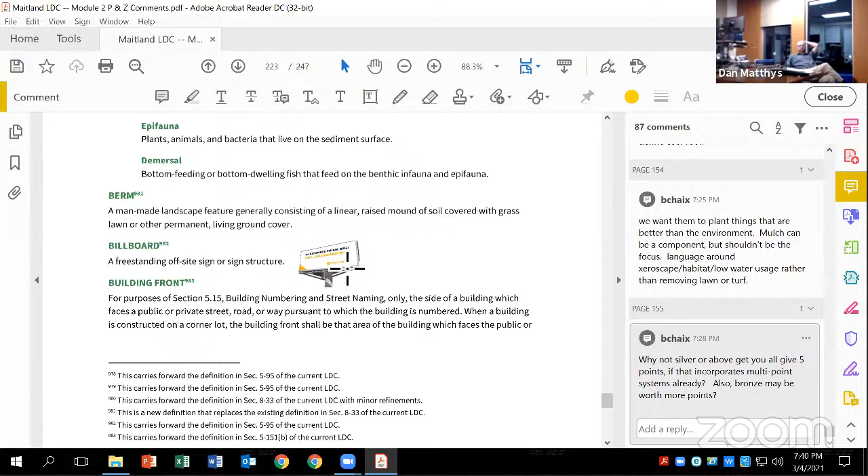Does that work for you? If it works for everybody else. There was some controversy in the last election about some big signs that went up on people's property, and is that a standalone sign? I'm fine with that. I didn't go down and reference the definition. I'm good if everybody's good.

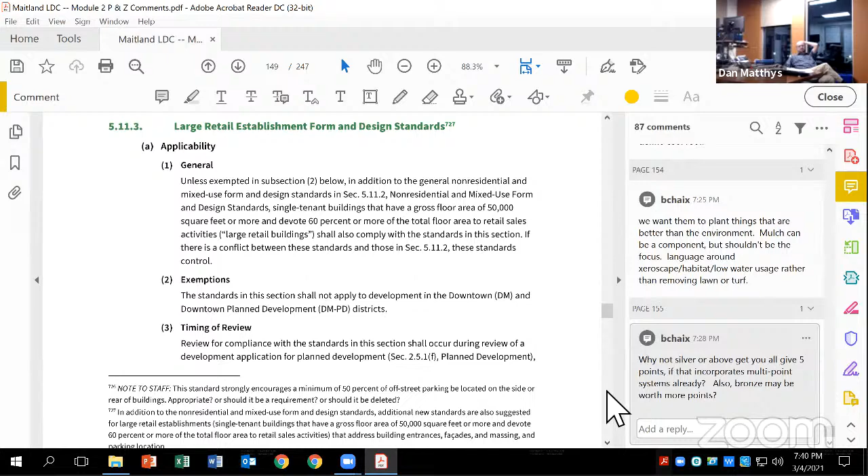Yeah, we got into a little bit of sign revision elsewhere. What we tried to do with the sign section is simplify it pretty significantly from what's existing, and fit pretty much everything into a table. First we list what's prohibited, and then we list general standards, but a lot of it is in that table of what's allowed where.

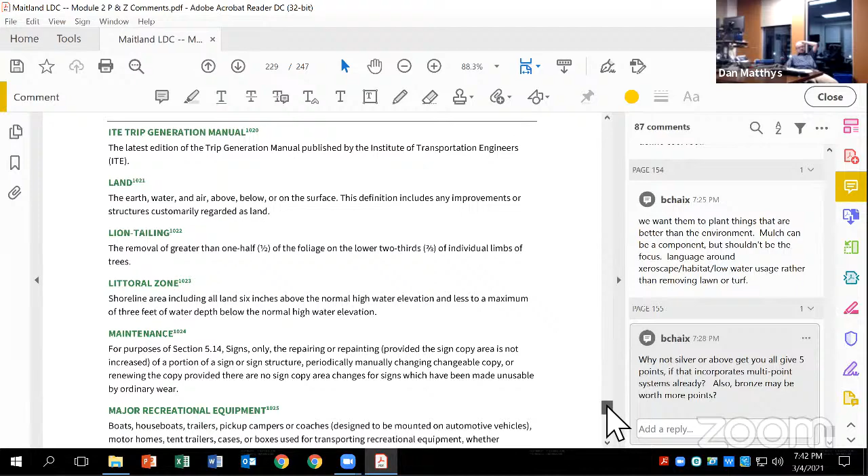Our political signs, are they defined in a different section? Yeah, if you go here, we have a lot of definitions in the sign section. So here we define what a sign is. And we did go in and amend the political and temporary signs.

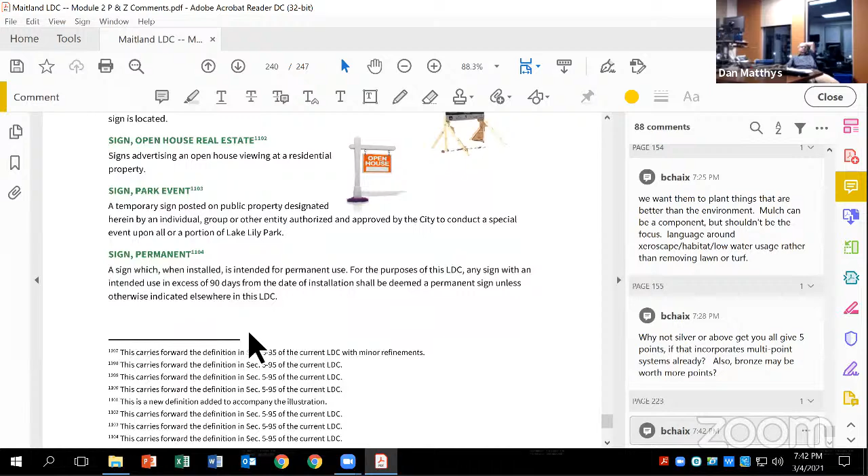I think they're not called political signs anymore. I believe they're called free expression signs. Here we go: a sign that communicates information or views of concern of the owner of the sign, or contains any other non-commercial message that is otherwise lawful. There's been a lot of court free speech rulings that the city has to comply with around this, so a lot of the wording, if it seems very specific, is based on court decisions.

But going back to billboard, do we want... so that should probably answer it. Yeah, it answers it for me. It just jumped out at me, and I didn't have the attention to detail to shoot down to the definition, so I'm good. Okay, everybody else is too.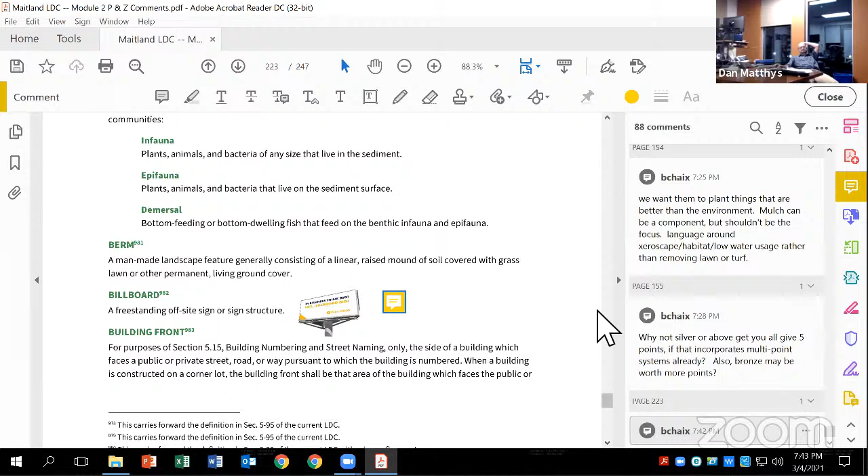The next one was about mobile billboards on page 157. Yeah, under S, it talks about mobile billboard signs being parked for more than 24 consecutive hours.

But then if you go to page 159, under permitted signs A to B, it says, except for mobile billboard signs that are prohibited under the section. Okay, never mind. I think I just answered it because it's prohibited and then it still says it's prohibited. Figured it out. Thank you. No problem.

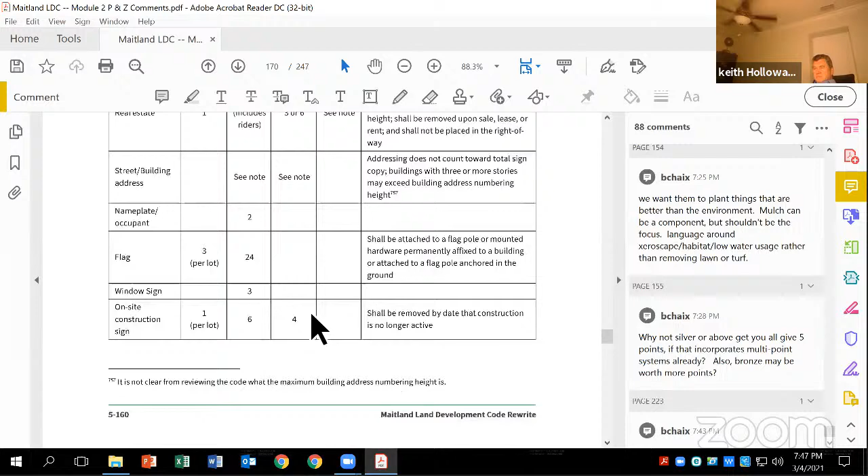Oh no, it's okay. That's the cell—it's blank, signs are not required to be removed. So this is saying you can have it up for 3 days and then you have to take it down.

Oh, but see, I look at it as somebody goes out there Saturday, Sunday, and then they go out there. If the house hasn't sold, they're out there Saturday, Sunday. I know people who do open houses every weekend on properties.

I don't—you have open house signs, and they go up for the open house and they come down. I mean, you're not leaving them up 24/7. It's just the way that's worded. I don't think you want to go there.

So if we just got rid of the word 'month' and just said it could be up for 3 days, but then as soon as they were down, they could come back up for—I don't know that.

Typically you don't see people putting them up for 3 days in a row. Usually it's open house, Saturday for 3 hours, Sunday for 3 hours. The signs go up, the signs come down. They usually don't stay up for any length of time otherwise.

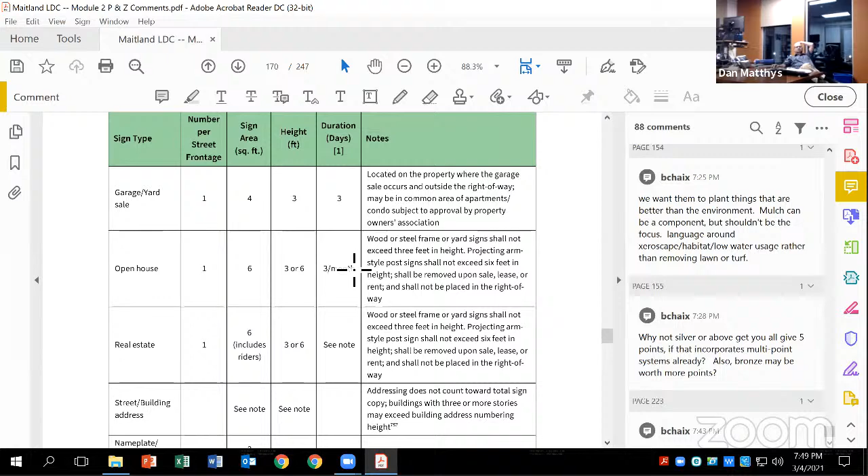Does that make sense? Kind of. I think I would just fix it to say—I think this is saying you can have it 3 days out of a month, but if we just got rid of that and said 3 days, the same way a garage sale is limited, I don't know that it hurts us to say there's no limit on the frequency you can have it, right? If we just say the duration is 3 days, I like that, because to Kathleen's comment, the likelihood is it'll only be up 1 day at a time, but we're not saying you can only do it 3 times in a month.

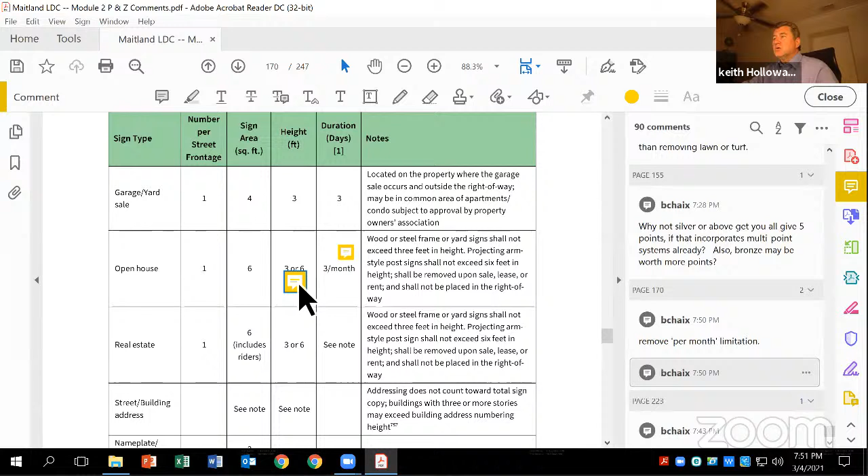Does that make more sense to people, or would you rather be able to see 3, 6 at a glance? I agree with Keith. Okay. That would be here and here. Yes.

And then I had another one down at the bottom of the page. So down on the on-site construction sign, I would put under duration days, 'see note.' Gotcha, because that note refers to the sign. Yeah, makes sense. Okay.

All right, so we addressed 42 and 41. 43 is next.

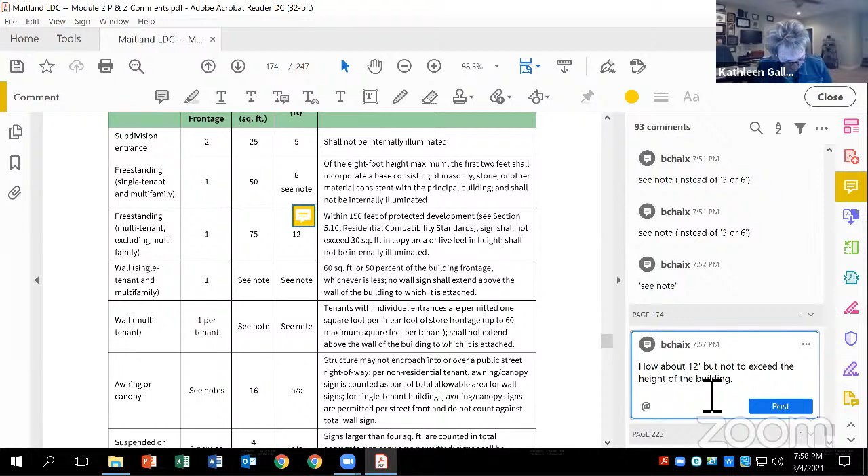Because even at Maitland Center, if you think about a lot of the office buildings with multi-tenants. I guess when you're driving, it just doesn't look that big. Yeah, I think that's the key thing there. 12 feet when you're 40 feet away from the edge of the roadway. I mean, you want to be able to make the sign large enough that they can see the tenants' names and signage on there.

All right, does that work for everybody? Yeah, I think one question on there, on what I would have along that same thinking, is, with the way we've evolved, is a big sign for a multi-tenant really the way you find what you're looking for? Or have you not Google searched it and mapped it out? I mean, is this an impulse? True, people, I think maybe I totally... How many tenants don't have a sign?

Yeah. Yeah, they're going to want to have a sign still. They're going to be concerned about their visibility and getting their name out there. Yeah, I don't think anybody's arguing that we should increase it from 12 feet, but I think the main argument for not decreasing it too much is just creating a bunch of non-conforming signs that people aren't going to be able to replace. And,

But I think this is a good nuance that might keep things from being out of character. And maybe signs will be part of our test fit exercise, that we can get a sense too of if things are in fact kind of out of character. Sure, yeah, good point, absolutely.

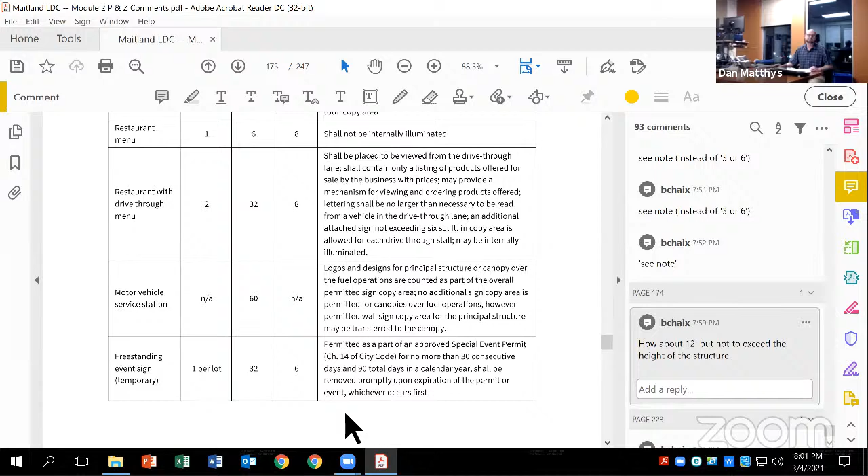All right, next comment, number 45, page 166. Aha, this is about removal. You want to introduce this one?

Is that mine? Yeah, well, I think I had two on that, and I may have missed the one. So going back to the banner at the top of the page, the banner sign. Oh, okay.

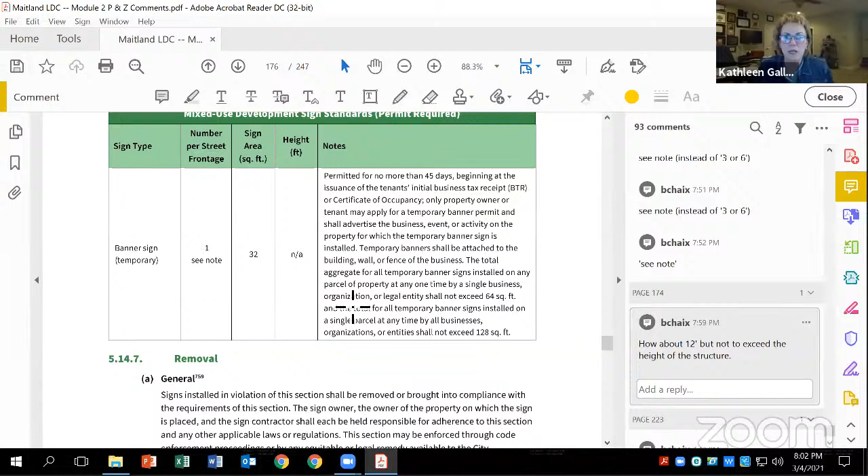The temporary banners are permitted for no more than 45 days. So the banner signs around the memory care that's going in off of Sandspur and Maitland Avenue, all those banner signs that are on the fencing there, is that what we're talking about? Because that's been there for more than 45 days. And I know this is the new code, but do you understand what I'm asking? Yes, I'm not positive I have the answers.

There's two aspects to that. One is that there might not be some things considered signs, and then other things by definition are like life scenes or images. I'm not positive about the content of the signs you're talking about, but by definition, some of them, if they're pictures of people in what we call a life scene, then they're not considered a banner sign. If they have words on it communicating information about a business, then they are a banner sign, and they probably shouldn't be up for more than 45 days. I don't know if those are.

I mean, I take your word for it. There might be those that aren't in compliance. But this states that from the initial business tax receipt or CO, and so those are all under construction banners. Oh, those might fall under construction signs, which I think are in a different category, right?

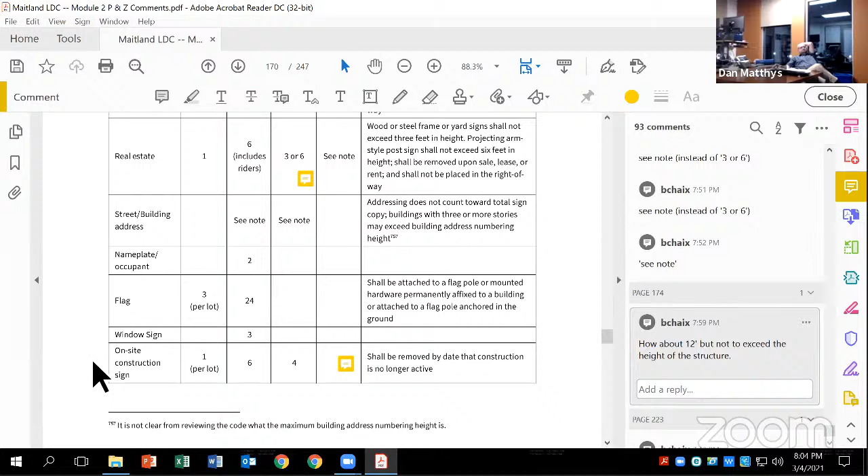Well, I mean, again, it goes to what do we want to see in the city of Maitland? Do we want to allow that? I will say the banners you're referencing are on the fence, and they're sort of a screening to the construction site itself. So do you want to see the construction site? And these are the ones you're referencing.

I don't know if there are better examples, but in the case of Maitland Boulevard, it's hiding a construction site. Right, but I mean, it's what do—and I agree with what you're saying—but what do we want to see, or what do we want to allow? Because is it not allowed, or is it allowed the way this is written?

And if you think of future construction sites, that seems to be more of the trend now, to have those lifestyle kind of pictures and whatnot, like you were saying, Barrett. Think of where they tore down the old hotel down the street, across from Burger King on 1792. Oh, that's going to become the strip center, Hill Park, yes, perfect example. And that's just renderings of the building, of what is supposed to be going in there.

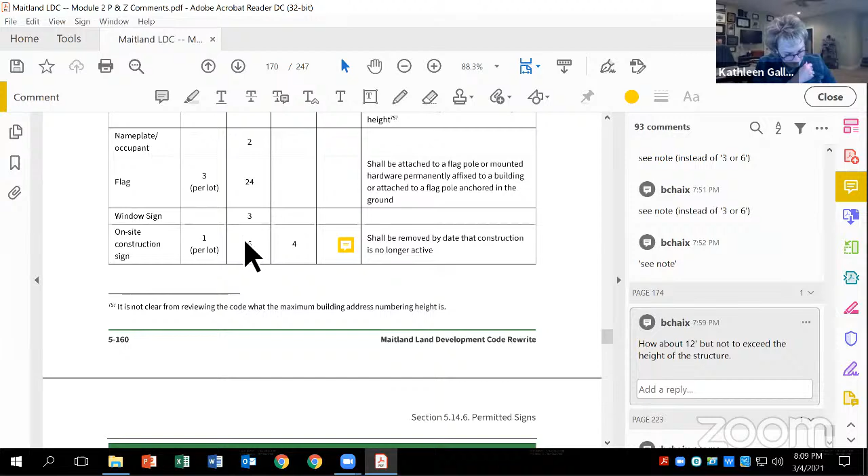Then the next one, the question I had is under removal, under general, it talks about the sign owner, the owner of the property on which the sign is placed, and the sign contractor each being held responsible for adherence to this section and any other applicable laws or regulations. More than likely—and I know a lease a lot of times tends to take care of this—but the property owner doesn't necessarily know what the tenant has placed out there. I didn't know if there was any language that... I guess the sign owner, correct? Would that be one and the same? Probably the tenant, right? Okay, then I'm good.

Moving on to building numbering and street naming.

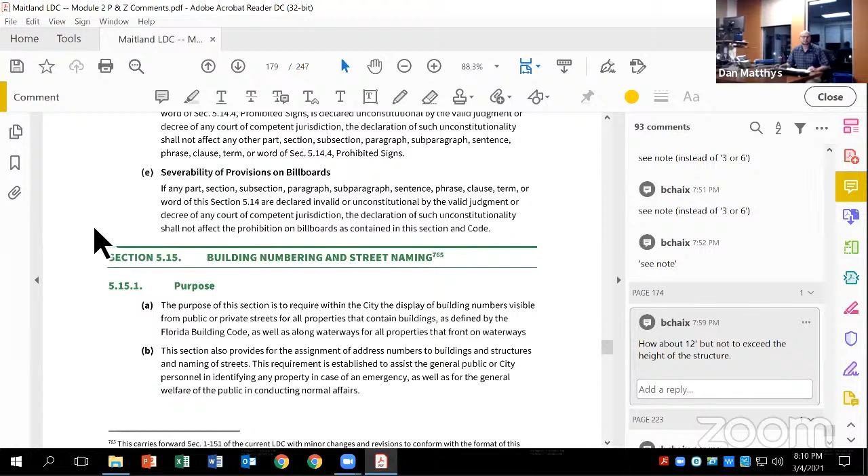So I think this was the one you had a comment on, comment number 46. I just wanted to make sure I understood the intent of this. It's talking about existing installations—does this mean that if something slipped by the city and they put up something non-conforming related to numbers, the city could come notify them that they need to get into compliance? Is that what this means?

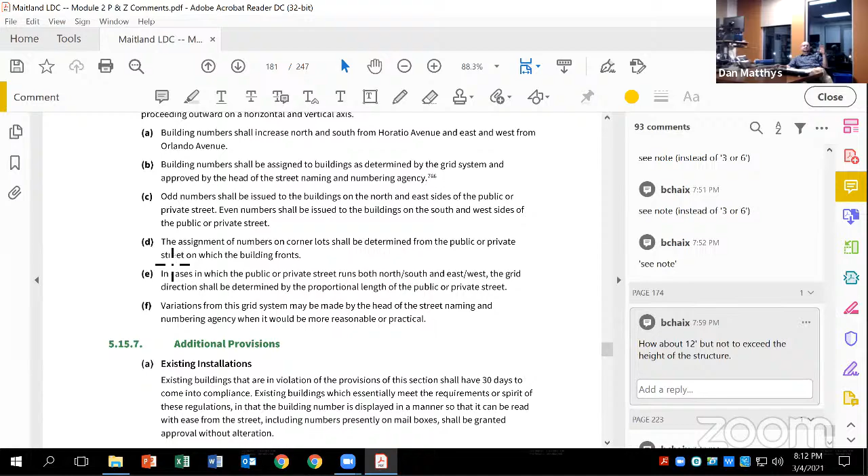I think this is broader than that. It would also include existing buildings—this doesn't apply to new construction, this applies to everybody in the city. However, because this is about safety, the purpose is for emergency services to be able to find where the emergency is. So we're asking that it's visible from the street, clearly visible in the front and back of the building. Basically we're saying, if you meet the spirit of this, you don't have to meet the exact letter of it—like if your number's prominently displayed on your mailbox, not on the front of your building, you're granted approval without alteration. That's all we're saying. This isn't trying to be the same as legal non-conformities, I'd say—that's the intent of it.

But so I guess what I'm also asking—if we told them, if we approved whatever they have from 10 years ago, have we changed our mind now and said, well, no, we've got a new code and you need to conform?

Yeah, I think so, but I don't think this is changing anything. I think this carries forward what we've got, with just minor wording changes—there's not any big changes in this new code update. So I want to say this language is probably already in there. I'm not positive, I'll have to check.

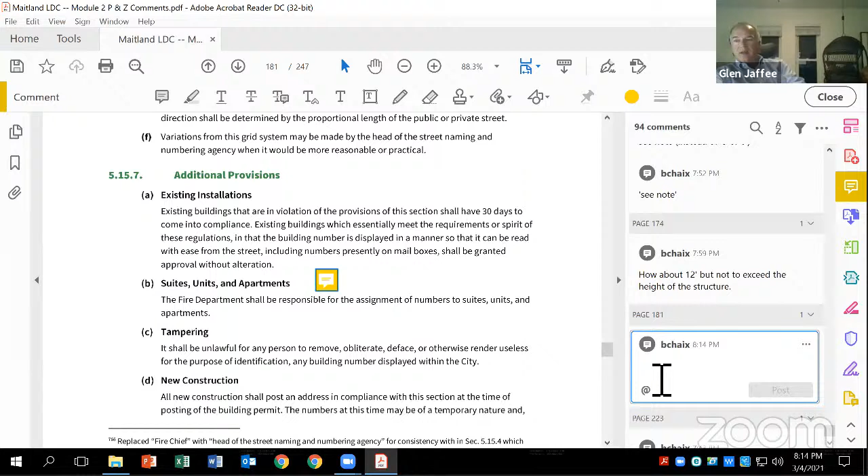See, I thought it was the building department. I think a post office assigns addresses. No, I think it's the fire department. I thought it was typically emergency services, because it all has to go into the emergency service response, like in GIS, so they can get it all cleared. But some bigger municipalities have a specific addressing person within public works.

Right, I guess where I was going was like the suites and the units, apartment number one, apartment number two. Do they pick out all that, or does the designer say, okay, I'm getting the basic address and now I'm going to show you what I'm proposing, and then they confirm it? Precisely, they're reviewing it, and if you provide something real wacky as a system of assigning numbers, they're going to say no, I want you to do it a different way, because ultimately the EMS folks have to find where the person's having an emergency.

But you're right, I think we can clarify that the designer proposes and the FD reviews. I don't know that you need to change it now that I read it closer and talked this out. It's just basically saying they're responsible for the assignment.

They are. It made me think of the old thing, not putting a 13th floor on a building, or not having a unit 13. Do people still do that? Do they skip certain numbers? Yeah, yes, they do. Okay, interesting. I guess the fire department says whether that's allowed or not.